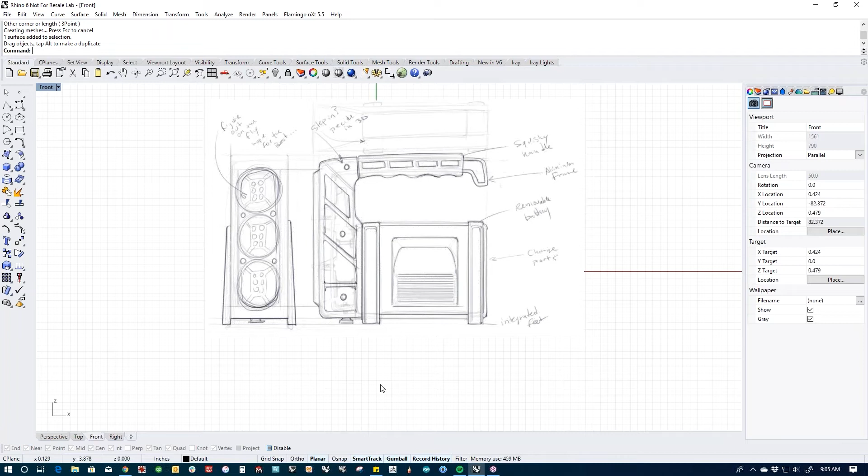So I decided to design my own, and I did a little thinking about how I wanted to put this thing together. What I was thinking is that this would originally be built off like an aluminum bent frame—this frame comes all the way around here, I'm tracing around this thing. It makes this kind of space frame, then in the front it has this kind of housing that goes over the front, and a battery that tucks in here, and it's got a handle, and then these lenses that we're going to have to figure out what they look like. So this is kind of what I was thinking.

It's a little bit of an ambitious build for an hour, so I may have to lean on the gas a little bit to do this—we may get through it, we may not. I think I can pull it off, but who knows? These sessions are always a little bit of a mystery. If you've been watching a lot of these, you'll see some of them work out great, and some I run right into the fan, and that's okay, because sometimes when it all burns down around you is when some of the most poignant lessons come out. So buckle your seatbelts, we're gonna go fast and try to get this thing pulled off.

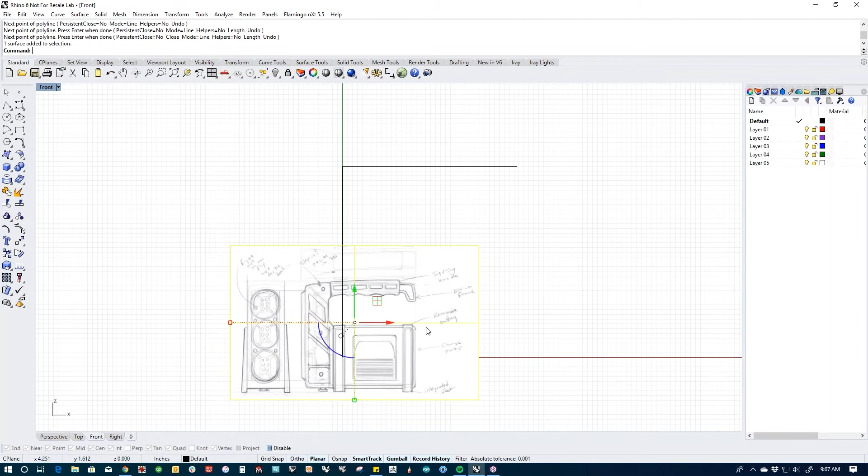So if I were doing this for real, I'd first want to establish some sort of scale, and I'm gonna say this thing is about 10 inches tall. So I'll snap a line at 0, type 10, hit enter, and make a little hockey stick up here that I'm going to base this thing off of. If I pick where the bottom is, say scale, start from here, and scale it up till it matches that line, I know my sketch is now from bottom to top 10 inches.

I can get rid of this line, and then start figuring out what's going on with this sketch. Now, when I build something, I always start with a sketch—I already said that—but I also take the sketch and slide it out of the modeling window, because what I don't want is the model intersecting the sketch, especially in shaded mode where you can't see the sketch. So I usually slide it back in space; it's still in the correct position from the front view, but you can see the sketch as you rotate around the model and see the details. I typically tuck that off in the background so it's out of the way, and then I stick it on a layer.

And the reason I do that is because now I can turn it on or off. I can also lock it so that it's out of the way and it's really unobtrusive.

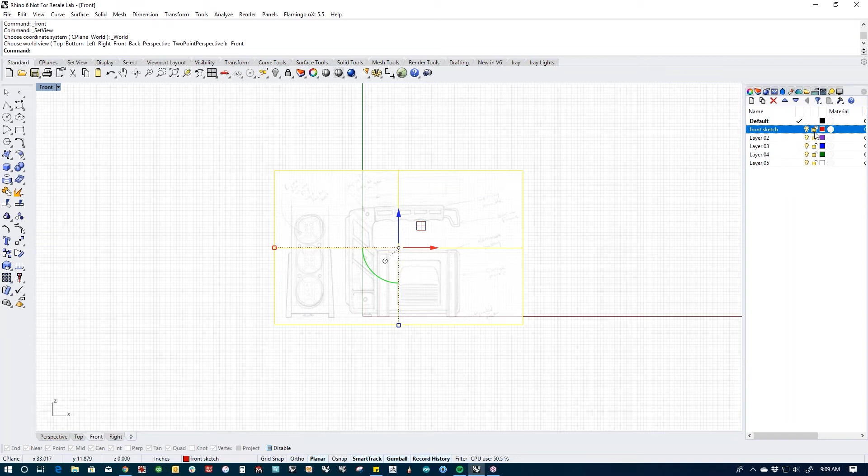All right. And then the last thing I need to do is I need to go to the properties, and I need to go to the materials for this particular object. And you can see that it's listed as a picture frame object or a picture object in 6. And I'm going to just crank the transparency slider up a little bit so that it fades back so that I can actually work over it and not have it be in the way. Once I've got that done, I'll just go ahead and lock this, and then I can work over it all day long and not have any problems.

All right. So let's go ahead and lay out this frame first, because that's kind of the thing that's going to start with. And I'm going to just do this with a polyline, and I'm going to start here and I'm going to just shift click and make this frame. And if you're looking at my really messy line work, you can see that I'm kind of all over the place with line thickness and things like that, but I'm not going to worry too much about it because we'll fix it here.

And the frame, I don't know if you can see this in the sketch, but I was thinking about how this thing was put together. And the frame I was thinking would come in here like this, and then come down and come close to here, and then come back up. Actually, I'm going to make that closer to the end here.

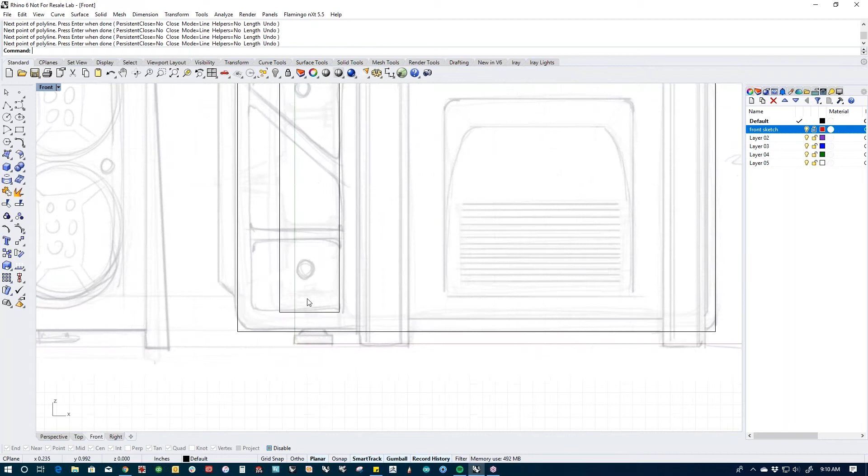And the idea was that this frame kind of flexed, right? It was a single piece of aluminum, and then it had a bolt down here that went through it that squeezed this portion, which then squeezed the battery and kept the battery from falling out. So that's my design thinking, and I'm sticking with it for this point.

So let's turn the points on, and then I'm going to take this point here, and I'm just going to use Gumball, and I'm going to snap it to there, and then I'm going to pick this, and I'm going to use Gumball to snap it over there so that everything lines up.

Now, one quick thing about Gumball. If your Gumball doesn't snap, click the bunny tail here and make sure that you have it set to snappy dragging, not smooth dragging. Snappy dragging respects O-snaps, smooth dragging does not. And I believe smooth dragging is the default. It may have been changed. It used to be smooth dragging was the default, but snappy dragging allows it to respect O-snaps, which is super useful.

So the next thing I'm going to do is I'm going to actually offset this curve because I need to get my thickness in here. So I'm just going to go up here and offset. I'm going to do this before I add any fillets or anything like that. 0.25 is a little high. Let's go 0.2. Maybe that's a little bit too big still. 0.18, something like that should work. So you can see I have my offset here.

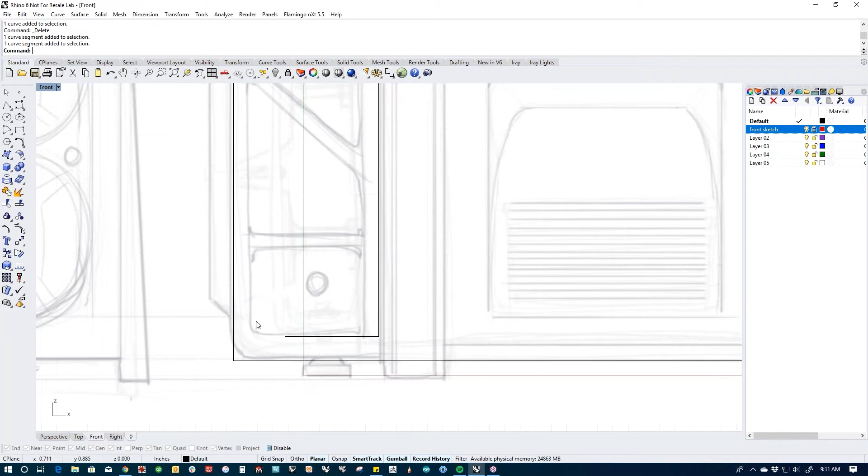And that doesn't give me a whole lot of compression in here. So I think what I'm going to do is delete that and actually open this up a little bit like that. And then I'm going to offset again.

One of the reasons that I do this stuff in this kind of sketch conversation with myself is to try and figure things out in sketch form, but sketches aren't real, right? You can lie, cheat, and steal in a sketch like nobody's business and get away with it. When you get into 3D, the decisions that you make are real. And so what I tend to do is I'll do a little bit of planning and talking to myself with the sketch. And then once we get into Rhino and the decisions that we're making are real, then I start to adjust things.

So I could tell right away that this wasn't going to be enough compression for this thing. I'd never be able to get a battery in and out of there because there wouldn't be enough flex in this frame. So I had to open that up a little bit.

So now let's use a command called fillet polylines, fillet corners. And what this is going to do is fillet every corner in the polyline, and a 1-inch fillet radius is way too much. So let's do a 0.1 and see what that looks like. And you can see it goes through and fillets every single edge on the polyline.

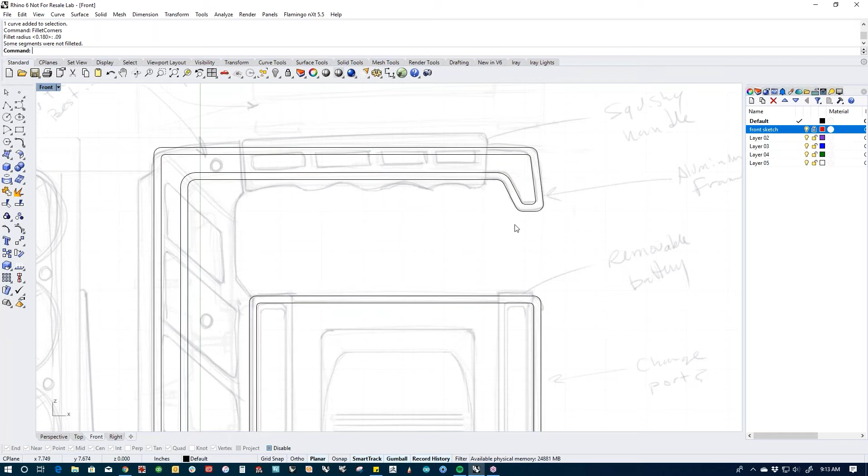And I think 0.1 is not quite enough for this, so I'm going to redo it and do 0.25, and that's too much. So let's do 0.18, and I think that feels about right. So now I need to do the inside corners. So let's do this, and I'm gonna do like, I don't know, 0.09, and that should give me kind of a comfortable offset around this whole thing.

So let's take this and turn it into a planar surface, and then we'll take this and, using the extrude dot on Gumball, I'm gonna hold down Shift and extrude in both directions. And I'm going to just guess at how much width I need because I can always look at it and adjust it visually later. And I kind of feel like that's a good amount of space for the circles on this thing.

And I can even start laying this out and say, okay, the lens on this thing is going to be about this big. And then I'm going to rotate this lens 90, and then let's look at it from the front view and see that actually works out all right. I think that's going to be okay. So for a width, that's probably good. We'll stick that landing here and call it good.

Now let's go ahead and build the battery because that's going to be the easiest thing to dig through, and I'm pulling at my collar a little bit here with the ambition of this for an hour, but we'll see how we do. So I'm going to steal this curve

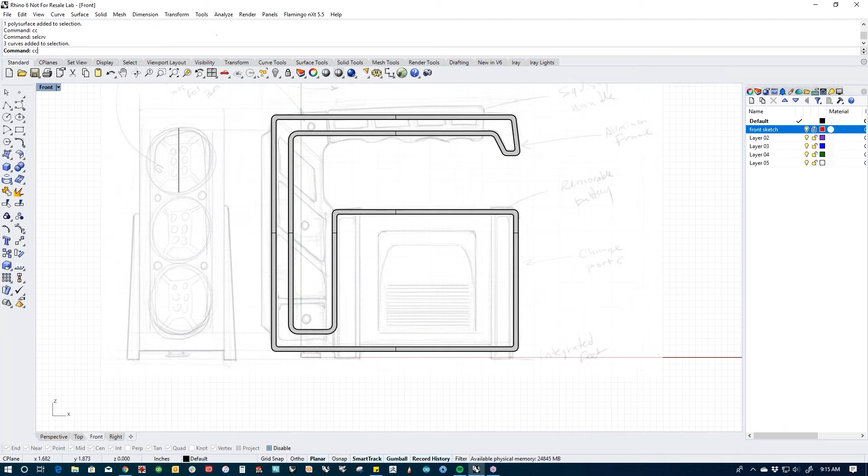right here, and I'm going to isolate that, explode it, and get rid of this and all of this and this and that, and then I'm going to take this point here and just pull it across there and then trim both of those edges off, and then we used a what, 0.09 fillet. I think that's what we did. Put it in here. So that is now the battery case curve.

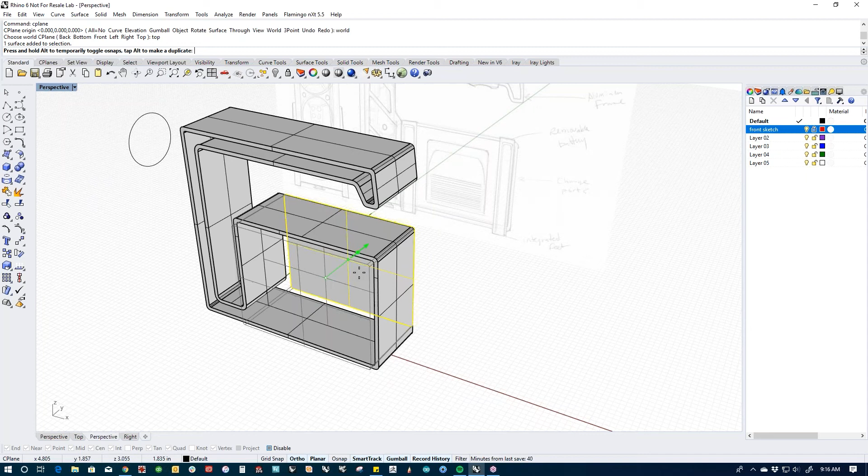And I wanted that to fit tight, right? Because this is like a friction fit between these two. So let's turn this into a planar object and then click on it, hit the extrude dot, hold down shift, and I want this to poke out a little past it like that. Okay, and then we'll build these little feet, and watch this.

I don't want to work hard. I want to lie, cheat, and steal when it comes to computer modeling. Not in life. That's not right. We don't do that in life. But computer modeling, lie, cheat, steal. That's what we want to do.

And I'm going to just steal that part because it's already built. And I'm going to scale it like this to get that foot. And I'm going to make it a little bigger. So it has to come out like that.

And then I may actually even take, I was playing around in the front view if you look at this, and I think that I want this to have a little bit of a trapezoidal shape. So let's look at that. And I may make this a little wider, maybe even a little wider. And then let's just draw a line and hack it off. Something like that. About like that. That feels right.

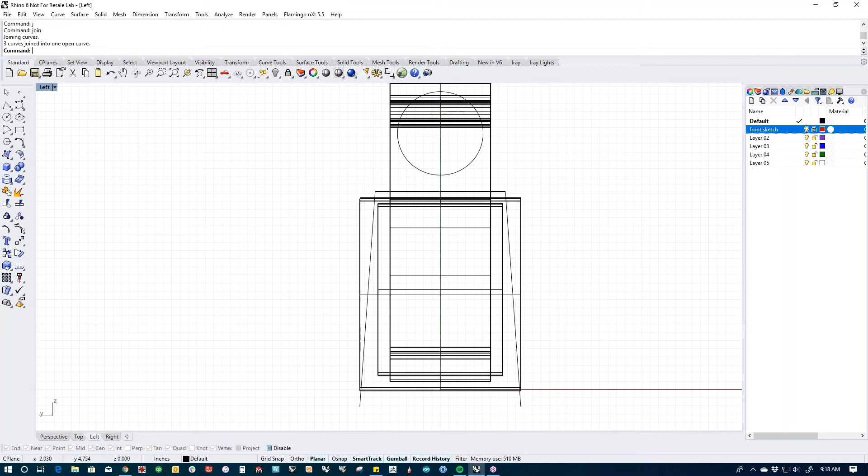And then let's mirror it. I have a hotkey set up for the mirror command if you're wondering where that came from. I'll try and at least call out the commands if I'm using hotkeys. I am going to use hotkeys today because I have to move fast. And then we're going to use the wire cut command, and we're going to just cut right through this thing.

Now, you'll notice something that I did. I took this curve and I connected it because wire cut only lets you pick one curve at a time. So say, for instance, you've got an object and you need to do a complicated wire cut through it, like you need to cut it here, and like that, and like this, and like that, right? Say this is your object, and you needed to cut it through like that. Just go ahead and connect the ends of these and turn this into one curve.

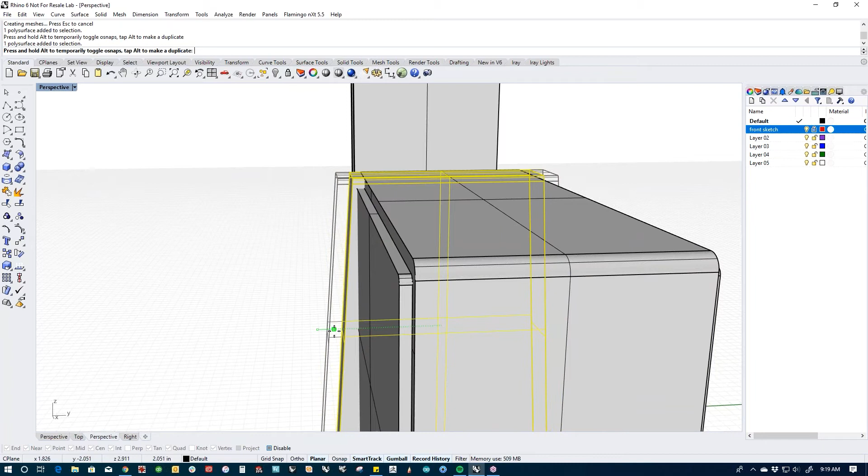And then you can wire cut through the thing all at one time, and that'll save you having to do it twice. All right, so I wire cut through, got rid of these pieces, and that gives me that guy. And maybe this battery's a little wide. Maybe the battery fits very close to within the frame, and the feet hold it in like that. That feels a little better. It was starting to get a little crazy on me.

And then what I want to do is I want to actually finish the details on this thing first, because you can see there's a little detail back here on the side of it. So I'm going to build the details into this thing, then I'm going to copy it, then I'm going to Boolean it together, and then I'm going to Boolean out the parts so that it fits all together at the end. So let's go. I'm going to isolate this, which hides everything other than what you've picked. And let's go ahead and draw our detail.

And see how my fillets have gotten kind of stinky here? Watch this. I'm gonna again do a little bit of cheating, and I'm gonna just scale this thing a little wider and a little taller, and I'm gonna get my fillets back with a really sneaky little way of just taking a rounded rectangle and putting them back in, and then wire cut. Ta-da! There's my fillets again. So a lot easier than rebuilding it.

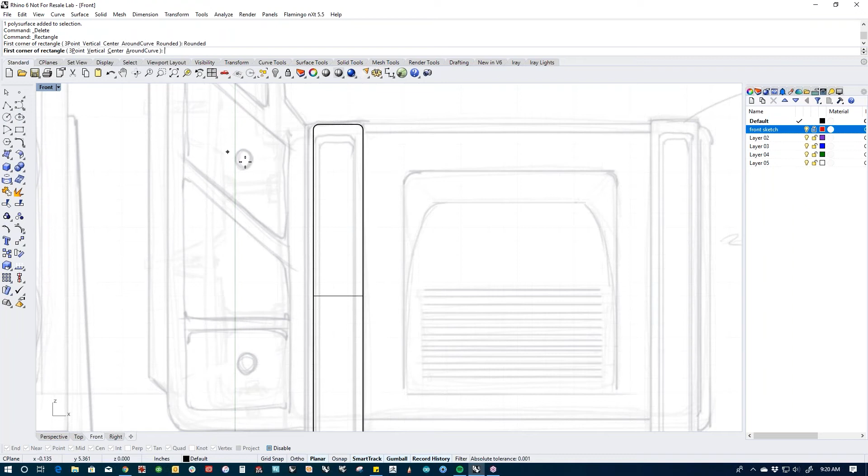All right, so let's add this little detail. And I'm going to do this with a rounded rectangle as well. Actually, I'm not. Or am I? Let's see. Yeah, rounded rectangle. And I'm going to draw this in here like this and put this detail in. And I am going to round that. But what I'm going to do is explode this and get rid of the bottom ones. And this is the formula for doing these details, by the way. I'm going to join this up, and then I'm going to copy and paste, and then I'm going to scale this down a little bit.

So you need an inside curve and an outside curve in order to make details like this. And if I turn these on, I'm just going to snap these points flat, and then I'm going to connect this. So this is the formula. You need an outside curve, an inside curve, and then these are going to be rail curves. And I just tipped my hand in how this is going to be done, right? So this is one rail, this is your other rail, and these are your generation curves.

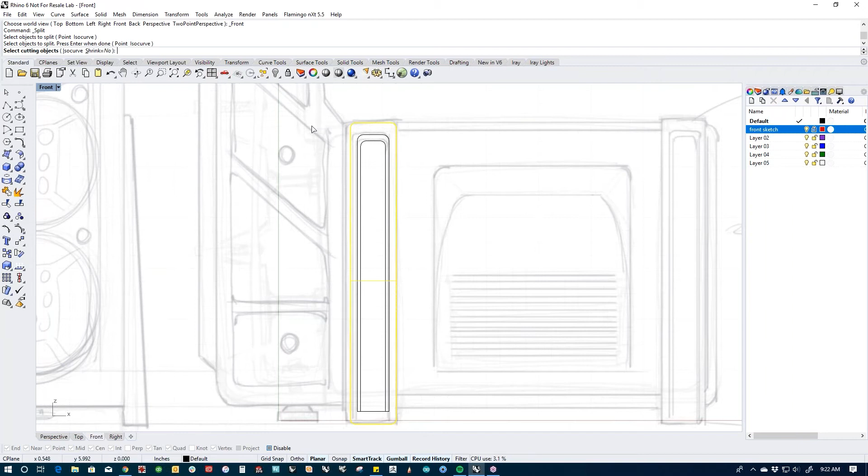And then the last piece that we need to do is we actually need to break this face into a couple pieces. So let's extract this face here. And let's get the curves and this face, and let's isolate it so that we're just working on that face. Now I'm going to use the split command, and I'm going to split this face using all of these curves. And the result is, I've got a face in here, I've got a face in here, and this is going to be your gap. This is where the blend is going to happen. So I'm going to delete that. And then I'm going to keep this face.

I'm going to go to my right-hand view, and I'm going to turn its points on. And you can see right now that it's just a degree 1 curve, right? It's only got points up here. So let's use shrink trimmed surface, and it shrinks it down, but it's still only degree 1, because it's only got 2 points. I'm going to change the degree to degree 3, and that's going to give me 4 points without changing its shape. Changing degree, if you're going up in degree, adds points, but it doesn't change your shape. Whereas rebuild, there's actually a tolerance in there. It'll actually move and change your shape a little bit.

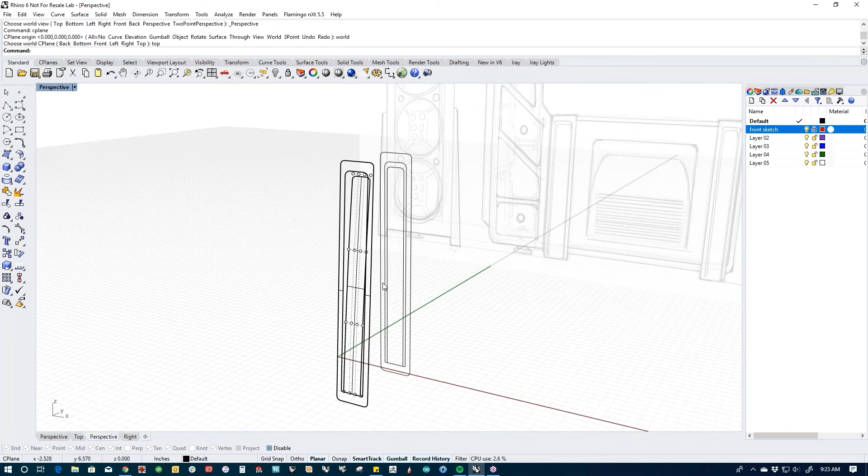And what this does is this gives me points. And the points I can bend. And so I'm going to come up here, I'm going to bend these points like that. And the reason I'm bending the points and not the surface is if I bend the points, the surface doesn't rebuild with the bend command. If I bend the surface, watch this.

Look what happens to the surface. See how it rebuilt? See all these extra points? If I bend the points, I'm just bending the points of the surface. So I'm actually using the bend deformer, and I'm leaving this row alone because I don't want to move it. I'm just bending the points. If I bend the points, then the surface is going to follow. It keeps it nice and light and super manageable.

Now I can join this up, and if I check my edges, you can see that this edge stayed joined down here, which is important. And then all I have to do is either run a blend surface or a 2-rail sweep set to tangency. And I get a nice little blend in there. Now, I probably wouldn't do this with 2-rail sweep because there's no control, right?

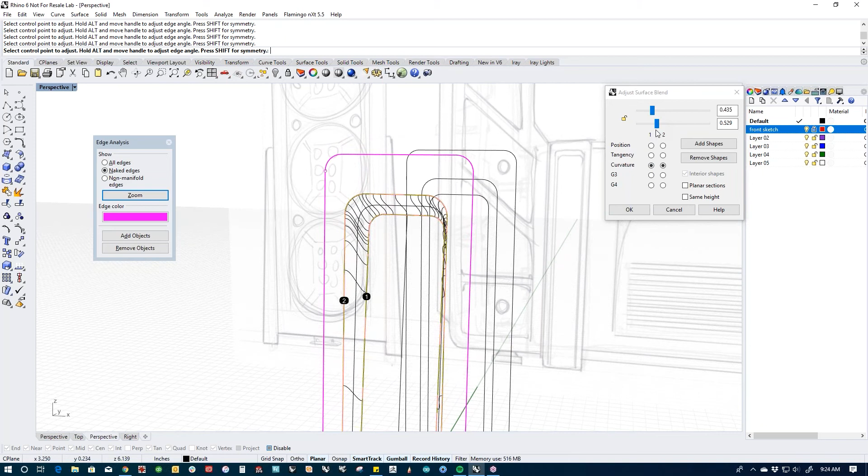And what I really want is to use a blend surface so that I can come in here and adjust this exactly how I want it. Maybe I want to tighten it up at the bottom, give it a little bit more at the top, and then say, okay, and that gives me my nice little blended pocket in there.

I may have to do a match surface at the end, may not, let's just see. And in this case, it looks like it joined up fine, so we'll go ahead and roll with that. So that's the detail there. I'll join it in. I'm going to knock the corners off of this thing at this point, and I'm going to do that with, I'm going to right click and use blend edges, chain the edges.

And what did we use on a corner in here? I can't quite remember. It was like 0.09 or something like that. So I'm gonna go ahead and do that. And if we preview it, we can see that this is going to be a mess right now. So it's way too big. So I'm going to set all and do like 0.06, something like that. And that just knocks that edge off. And that's cool. So because I've got one side done, I'm going to isolate, go to the top view.

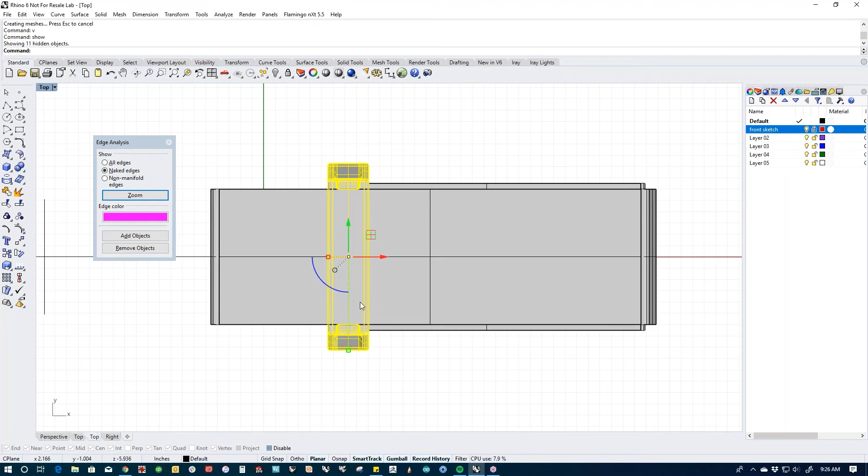I'm going to cut this thing in half. I'm going to mirror it. And then I'm going to go back here and steal this using an Alt drag with Gumball and put it back here. It's a lot of work without really all that much work, right? That's what we want. Now you can see that the battery is protruding through here, so we're going to have to deal with that. But other than that, I think we're in good shape.

Let's run the same blend on this thing to knock the edges off this. So I'm going to run the same blend on here. It remembered what our last setting was. So let's go ahead and run that. We should be good. And we are. And then we've got to figure out how to get this connected without this.

So I think what I'm going to do is I'm going to do a wire cut and then a Boolean, and I'm going to wire cut just around the detail here, like this. I'm going to have to do it twice, unless I was really clever and connected these. Actually, I could do it in one. Watch this. Take these two, curve Boolean, delete the input, and then that turns that into one curve, which I can then use as a wire cut.

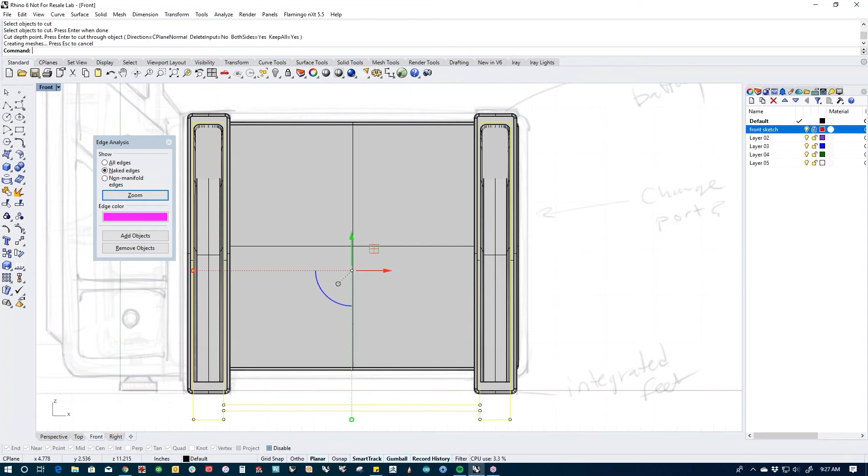And then I can get rid of these pieces, and then I can take all this and Boolean it together. Ta-da! So then we've got our battery. Now, the last thing I need to do is I need to fit that into the frame. So I am going to steal some inside surfaces here.

Copy this one, that one, and that one. Isolate just those guys. Grab this edge, drag it down.

Am I losing everything? You guys staying with me here? Or am I going too fast?

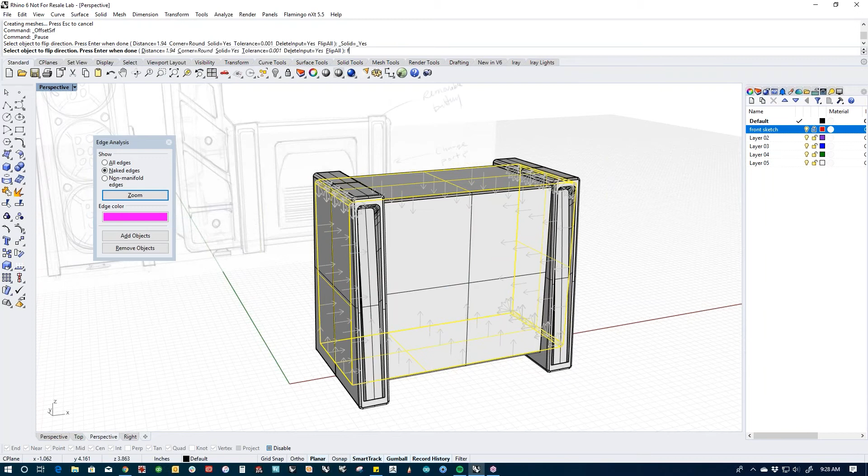I'm going to join those, and then I'm going to do a solid offset to the outside. And I'm going to do it big, like 2 inches, like that, because that's just going to make a big Boolean object. And then I'm going to remove this, subtract from that using this, and there's my cutout for my frame, and it fits perfectly.

All right. Still with me? Like breathing over here like I'm running a marathon. All right, let's keep moving.

So let's do this detail. We're going to do it the exact same way. I'm going to do this with a rounded rectangle. Same formula. And it doesn't matter what the shape. It can be like a parabolic shape. It can be a flare. It can be whatever you want to do. It's the same formula. So copy paste. I'm going to scale this down a little bit like this.

Actually, let's do this one differently. Let's do this one with a hard shape like this on the outside and then a different shape on the inside. So let's explode this, get rid of this, and then let's draw. I'm going to start from the center line, and I'm going to draw half of this. Only 3 points to make a corner, remember? We don't need 50 points to make a corner. And then we'll mirror this, join it up.

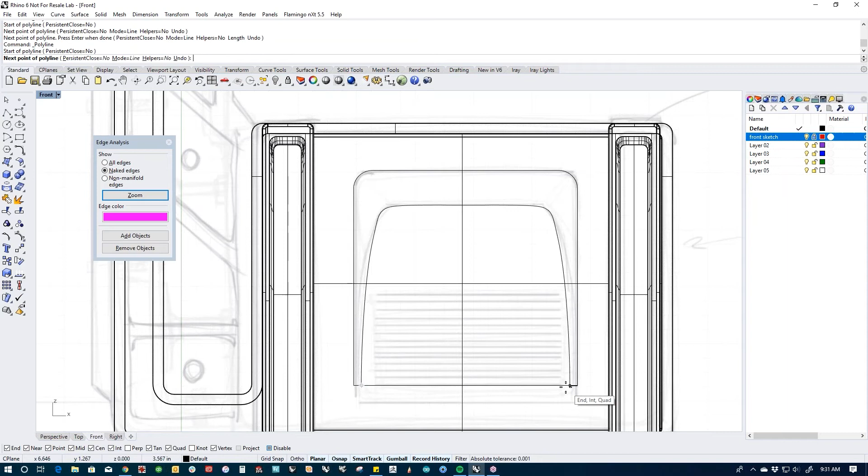All right, so we've got our outside curve, our inside curve, and then we've got the connectors down here. And then the last one is this that breaks this up into a couple pieces. So let's pop the surface out because we're only going to work on this surface. And we'll split. Split this up. This is our gap, so I'm going to get rid of that. This is our face, and I'm going to check to see what the points look like.

And in this case, it's still a degree 1, so I'm going to shrink it. Shrink trim surface brings it down small, and then I'm going to change the degree, 3 and 3. I'm going to leave the bottom points alone. I'm going to grab these points, go to the right view, bend. And I'm going to even start my bend away from the bottom down here because I don't want to mess with that at all. I'm going to bend this in kind of violently. But you can see even that big bend, it doesn't rebuild that surface because we bent the points and not the surface itself. So let's join this back up and make sure it joins.

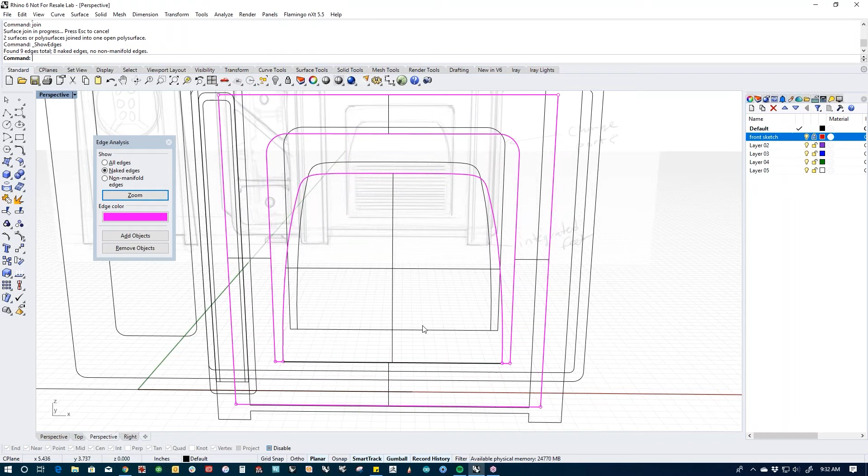If you've broken it, this will be when you'll see it because you'll see a pink line here instead of a black line. And so you want to just double check it before you go. And then I'm just going to run a blend in there, and I'm going to drag this a little smaller just to straighten out those isocurves just a little bit. And I don't need curvature. That's a little crazy. Say okay, and let's check it out. Okay, so that's our nice pocket. Should all join up, and it does. And you can see that we get a really nice kind of little technical detail in there.

All right, so let's add the ribbing in here. And I could have, before I bent this surface, put these details in there and then bent the surface, and the details would have bent as well. But I'll show you a trick on how to deal with that. So I'm going to take one, and I'm just going to do it a random width, like a 1/4 inch, and then let's go to shaded view, and I'm going to poke it through here, and I'm going to make it pretty big like that. Doesn't even really matter how big.

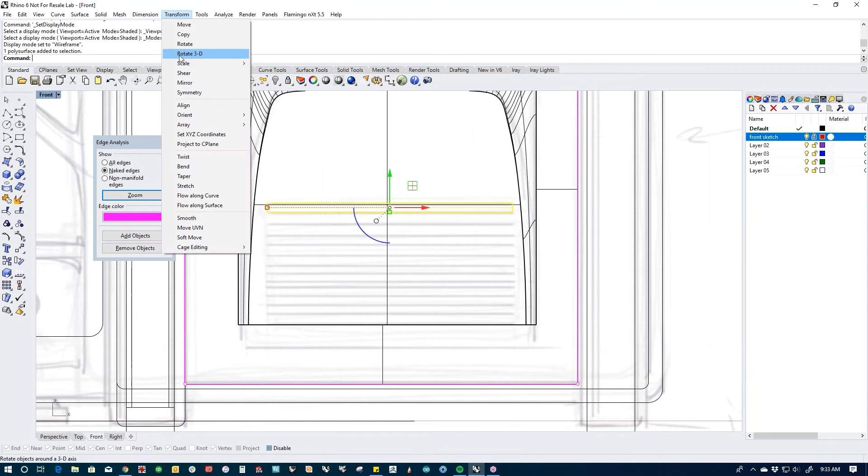And then let's take this, and I'm going to do a linear array, and let's do, I don't know, like 8 of them, 9 of them. And I'm going to start here, and we'll just pull down like this. And then there's another cool command. So that's the way to do it if you want them to be super even.

But what if you're like me and you just hack stuff together? And I were to drag these guys and say, okay, I want about this many, like that. And I would say that's about how many I want, but they're obviously not evenly spaced. Let's see if I'm remembering the right command.

I want to distribute all of these guys, and I want the spacing to be automatic, in the Z axis. You can see what it does is it should have updated all of those. Let's grab all of this stuff. I might have picked the wrong axis, I'm going to pick a direction I want to distribute them in.

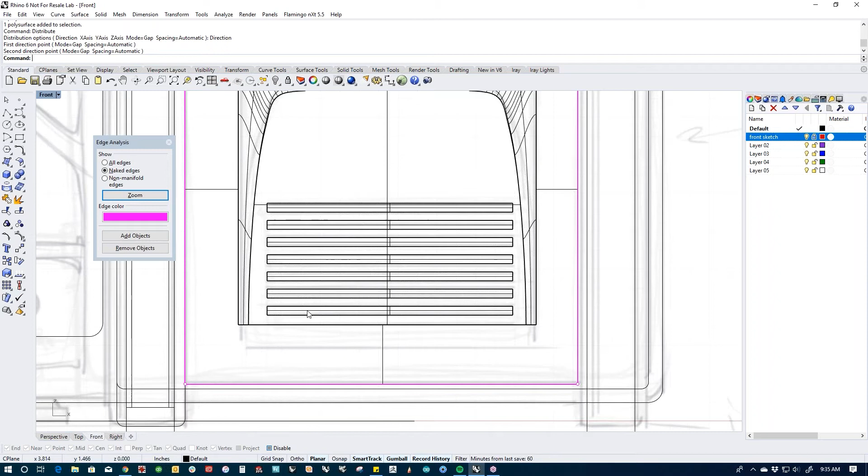I don't know if you do like I do, like when I'm putting rivets on something—I do a lot of models for the toy industry, and I'll have to put rivets and stuff on everything. I'll drop them down, and then I'll look at them and go, the spacing on that doesn't look right. If you select them all and say distribute, bloop, it redistributes them and makes them all the same spacing.

All right, and it looks like I jacked that up from the front view, but it doesn't even matter. I'm just going to pull these back. All they have to do is intersect the surface. It doesn't even really matter by how much, and I'll show you why.

Because what I'm going to do is take these and use a Boolean split with this object, and then I'm going to throw all of this away. And then I'm going to take these guys and just move them forward. I can even do this numerically if I know exactly how far I want to move them, but I never do anything numerically. So I'm just going to pull these guys forward a little bit, and then they poke through all the same. And then what I'll do is Boolean this stuff together.

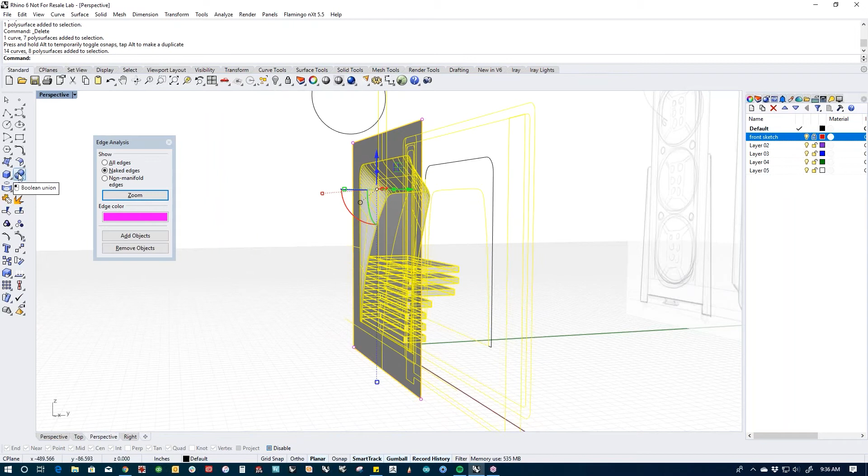And there's my finished detail. Bring it back. Got a face in here somewhere that I want to get rid of—this one. Isolate that, I'm going to delete this face. Mirror this, join it up. And there's our battery.

Woo, 937. Got to move.

So this battery handle, I'm thinking, is probably going to be a little bit too wide for holding it in your hand position. So we need to put a relief in here for where the handle is. I think what I was originally thinking was that the housing would blend into that, but I think what I'm going to do is actually neck in where the handle itself is. So let's figure out where that's going to happen.

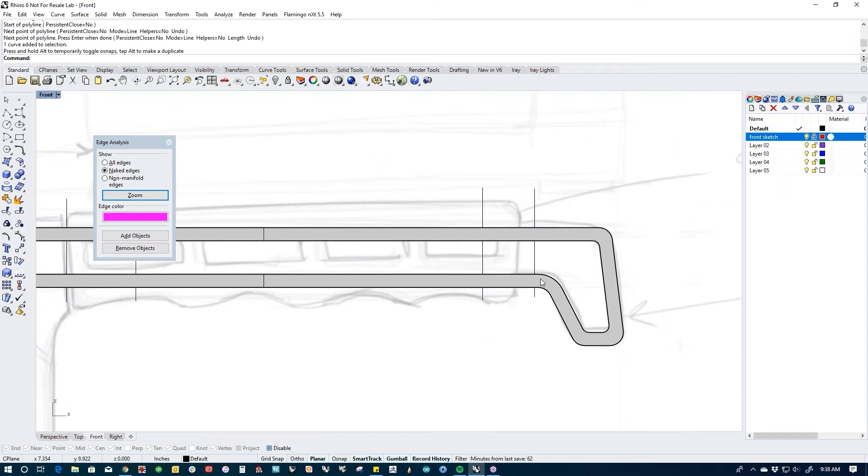I'm going to pull a trick where I'm going to split it here, here, maybe back a little farther, and then something like that. And because if I stay out of this fillet—because all of this stuff up here is essentially degree 1 flat surfaces—watch this. I can take this thing and split this object using all 4 of these curves.

And then I can join this all back together, which seems counterintuitive. But what it gives me is I can grab this and this, this and this, and then this and this, and use Gumball. I Control-Shift selected that, by the way—that's a sub-object selection. If you haven't used sub-object selections in Rhino, look up Brian James' video called Hello Gumball.

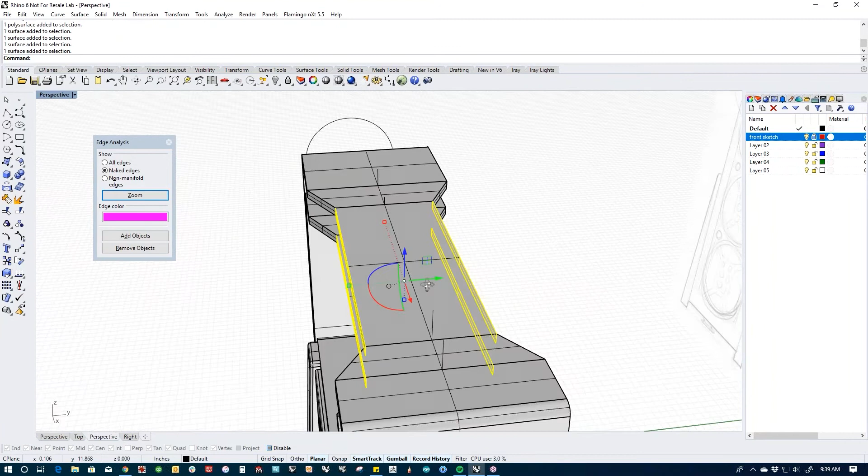Great stuff. And then I'm going to just scale these guys in and watch what happens. It all updates, but stays a single polysurface. And then it gives me the ability to later say, ooh, handle's not big enough, handle needs to be bigger, or maybe this thing needs to be much smaller. So I can just come in and repick these, Shift Control click, and then scale them in smaller.

And this element back here is now an element onto itself, so I can even say, well, that thing now looks too big, so I can scale that in. Because all of this is just degree 1, there's no calculation—it's just 2 points, just moving those 2 points closer and farther apart.

All right, so let's make the handle, and let's do that simply. Did everybody follow that, by the way? Subobject selection: Shift Control click on a polysurface. So a cube is a polysurface.

I'll show you some really quick gumball tricks. Shift Control click, drag to make it bigger or smaller. You can also rotate it. You can also drag, tap Alt, and break a face off. You can Shift Control click, drag, and extrude an additional face, which gives you the ability to extrude more faces, so you can actually do some little box modeling type of stuff.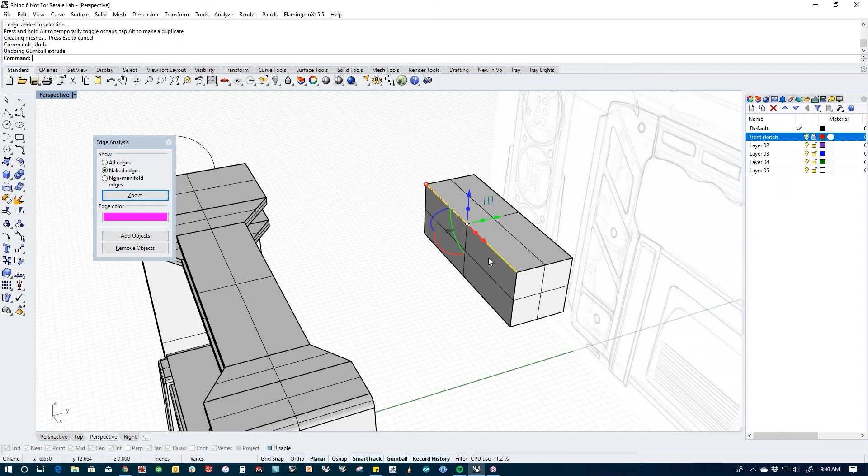You can Shift Control click on an edge. You can modify just an edge. Shift Control click on an edge and extrude just an edge. Or you can drag, tap Alt, and break an edge off and have a new curve. All right, the rest you'll have to watch Brian's video, but that's a little primer as to what Gumball can do for you.

All right, so let's go ahead and draw this thing. I'm going to do it as a square object, and then we will knock the edges off later. I'm just going to pull this a little farther, like that. Close that up, and then I'll go ahead and put the finger nubs in here. I'm going to do that with an ellipse.

And we will copy, settle down. And again, this is a situation where I could use distribute because I just copy pasted those things. So I'm gonna distribute, direction is gonna be from here to here. And you can see that it just evened up the spacing on that.

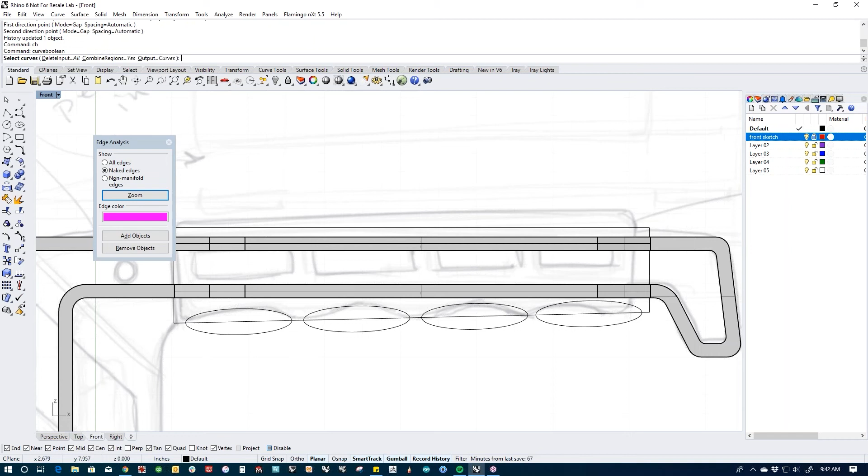Do a curve Boolean. We're going to pick all of this stuff. We're going to delete the input, and I'm going to pick inside here, and it'll get rid of everything else. And I don't like this, so I'm going to explode this, and then we'll use blend curves between the two. Something like that. I'm moving quick here, so I'm not really nailing these down accurately, but you get the gist.

Join that up. Turn into a planar object. We've done this dance before. Start extruding, hold down shift, and I'm going to bring it all the way out past the edges here. And then I have to get it to the right shape first.

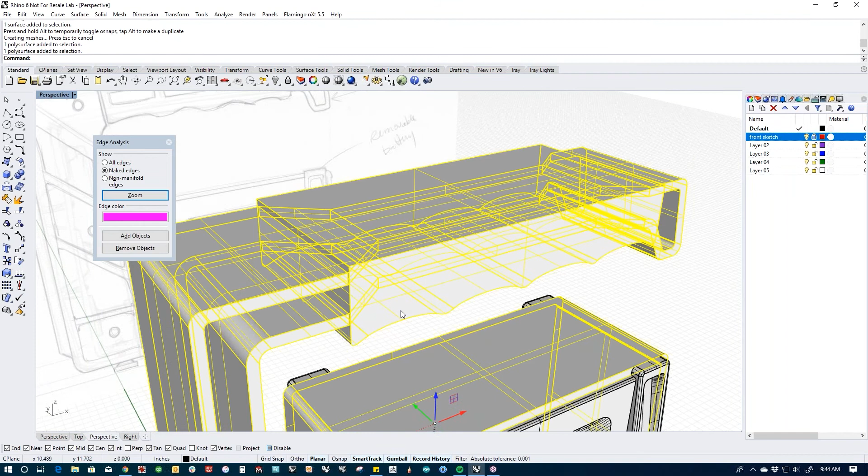So let's isolate these. Ooh, getting close. And then I'm going to do this with a little softer profile. I'm going to mirror it. I'm going to connect them so that I can cheat and do wireframe all at one time, or wire cut. Like that. And ideally, I would have a little softer handle on that.

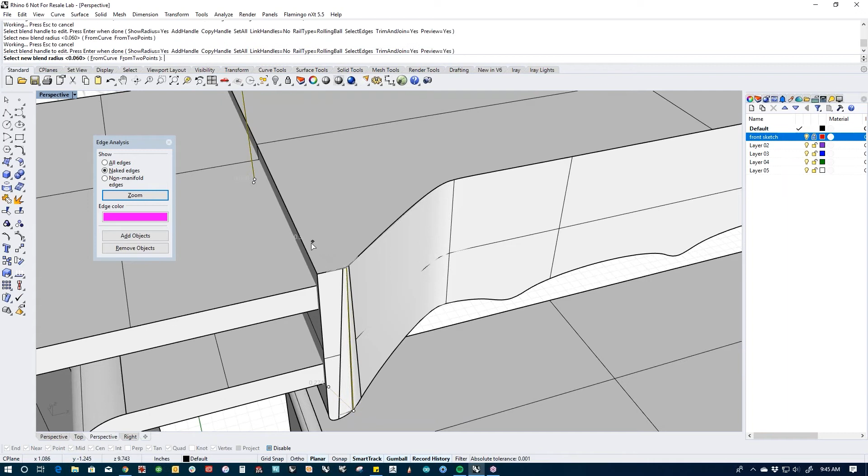So let's do some filleting. The radiuses and stuff on this are pretty tight, so we'll have to do it a little bit at a time. Let's do these first, and let's try and get these as big as we can get them. Let's make those bigger, right, like that. That's 0.03. Let's try 0.035. So that'll work, and 0.035 is as big as we can go because that's what this radius is.

So let's do these edges up here, and we'll do those at... can't do it at 0.035. We have to do it a little bit smaller than that, because if we try to do a blend on top of a blend at the same radius, it'll fail. And in that case, it's still failing. So let's do... there we go, that'll go. Do the same thing over here.

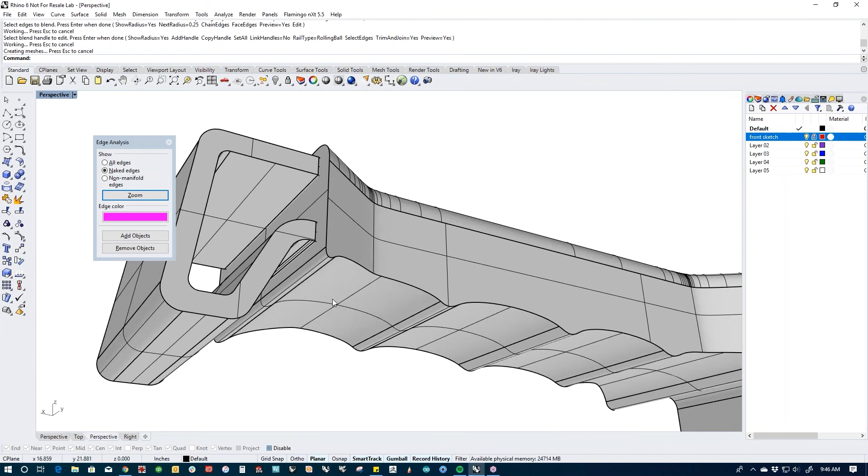And then at the bottom, we've got a little complicator down here. We may actually need to do a variable fillet in order to get that to go. But the other thing we could do, which would knock this off and make a bit different scenario for ourselves, or we could even do something interesting like this, where we pull out all of this. I think I'm going to like this better. Maybe not, maybe it'll be a horrible failure. We'll see. And I'm going to chain this.

Maybe I want to split this edge. Here's a cool trick: split edge. Oh, there's actually a split there already. When you turn on your edges, see these dots? Split edge allows you to break this into smaller pieces.

So let's do chain edges, but I'm not going to auto chain them. I'm going to pick which ones I want, and then we'll do the same ones on the other side. This is going to give us a really nice soft handle, or it's going to make a horrible mess. We'll see.

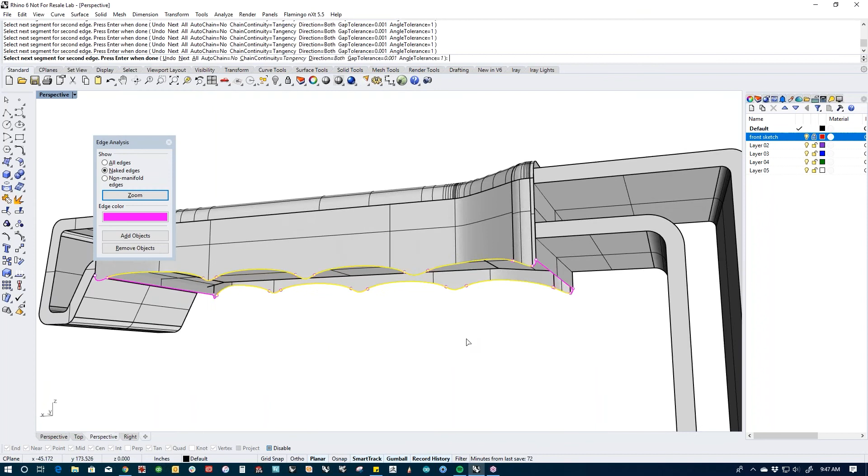Kind of a horrible mess at this point. I'm going to take out the interior shapes, and then let's back this way off.

In this case, I like all of this. I don't like this, so I'm going to shift drag and make that much smaller. And then I'm going to shift drag this and make that much smaller. And then I'm going to add a shape kind of somewhere in the middle, shift drag and make that smaller, but it's going to give me some more control in the middle of here.

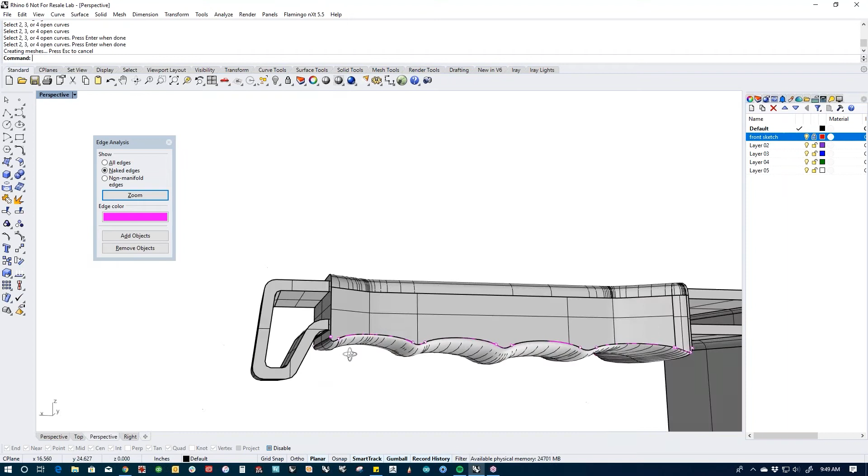All right, that wasn't terrible. This is going to be a little messy up here, so I'm going to just hold my nose and do it, but I'm going to just do a four-sided surface right there and a four-sided surface right there. Sometimes winning ugly is still winning, and I think at this point we're winning ugly on that, but I'm going to just call it good.

All right, how are we doing so far? Everybody still with me? Nobody's run for the door yet.

Let's add our little details in here. I'm going to do those with rounded rectangles, and I'm going to alt drag or drag with an alt tap. And I'm going to use the magical distribute command again.

In this direction, and it just makes that all just work fantastically. So because I can't wire cut closed curves, I'm gonna just shift drag and extrude those as a surface. And then I'm gonna cap these.

So nothing that we're doing today is hard. This is all like really pretty basic stuff. But what I'm trying to do is give you different ways to think about how to use these tools so that you can use them more efficiently.

And I'm going to just knock the edges off this just a tiny little bit, and I'm going to use a very small one. That'll work.

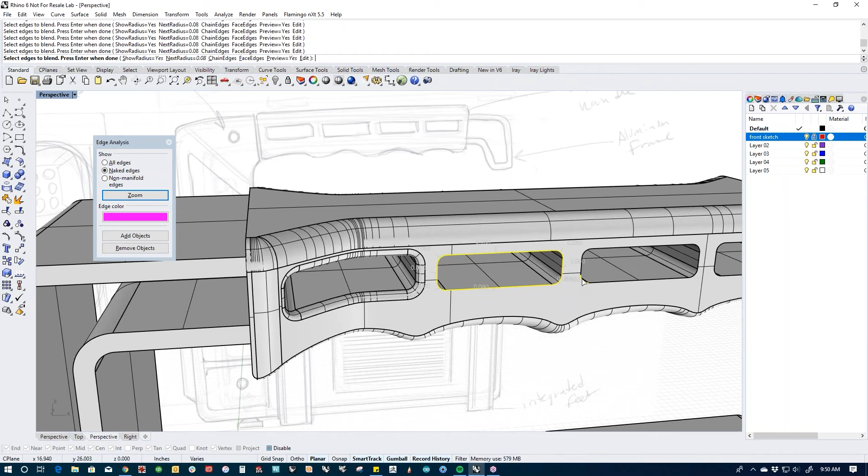I could use chain, but I'm already in it. I'll use chain for the other side. All right, so those all worked. Over here, I am going to chain these. Chain this one. Chain this one. Chain that one.

All right, so there's our handle. And I probably would knock the back of this off at a later date, but I think I'm fighting time, so I'm going to keep rolling.

So let's make our housing. Let's see what we got so far. How we doing? That looks kind of coolish. So let's make our housing.

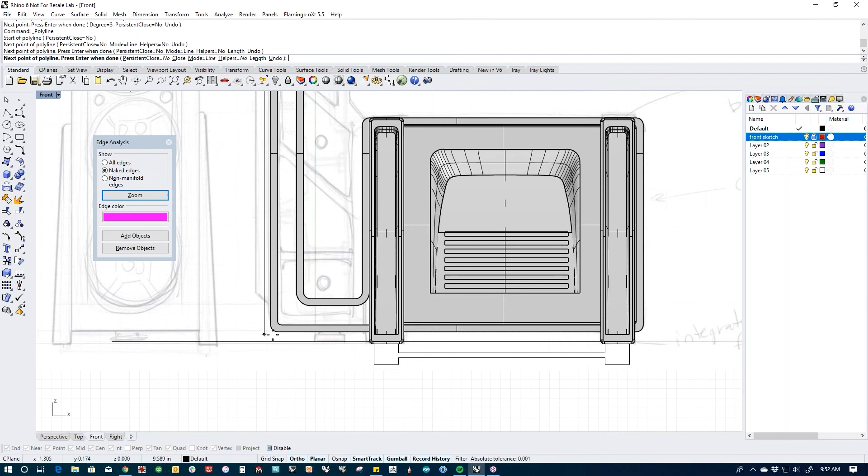I'm going to do this just by starting to draw a curve here. Actually, I'm going to do this with a polyline, and we'll clean it up later. The reason I do polylines first is because you can always go and mess with them later and get what you need out of it by cleaning it up and adding fillets.

And then I'm gonna do a blend from here to here, but the second one is gonna be positioned like that. All right, so now I can go and clean this up with fillet. Maybe bigger. That'll work.

That'll work. I'm gonna leave this one sharp. I'm gonna knock that one off, and I'm gonna leave that one sharp. Planar surface, same thing we were doing before. Extrude, shift drag, and we're gonna get it out just outside the frame, like that. I'm gonna knock the edges of this thing off with blend.

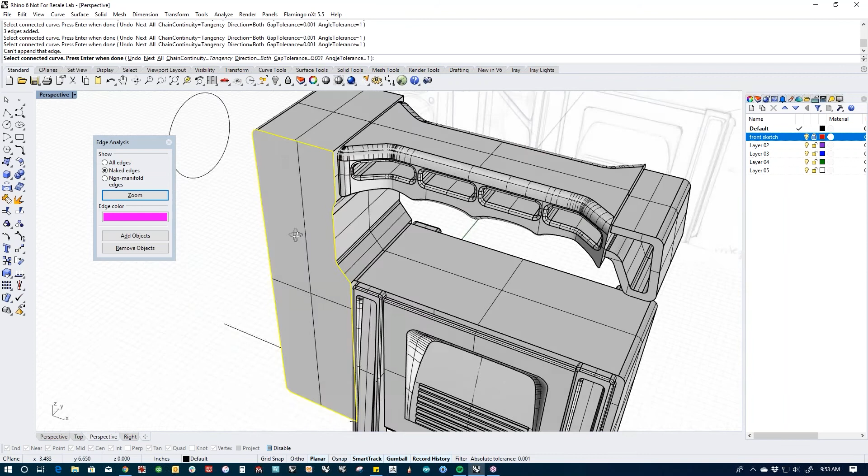Let's see, I wanna get this one as well, and then chain these edges. Get that one as well. Probably this one too. That should get everything kind of softened. There we go.

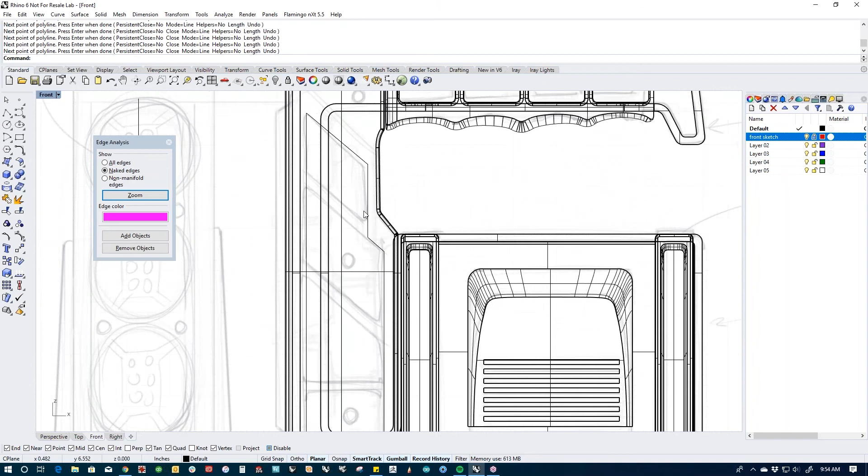Let's put our details in. I'm just going to draw those in. Actually, I'm going to do it like this so that they all line up. Otherwise, this stuff never lines up. There we go.

I'm gonna alt tap drag on that. I'm gonna change my gumball location to here and then drag it to the end. That way that lines up right at the end.

And then I'm gonna do the same thing down here, drag, tap alt, and then I'm gonna extend. Extend, where are you? Extend, it's in here. Here we go, extend curve.

And then just one more down here. Then we'll use curve Boolean to clean all this up. Grab all this. Isolate, grab everything, curve Boolean, keep. Gives us that. And then I'm gonna join all of this. Should already be joined. And then I'm gonna fillet corners. Do it all at one time.

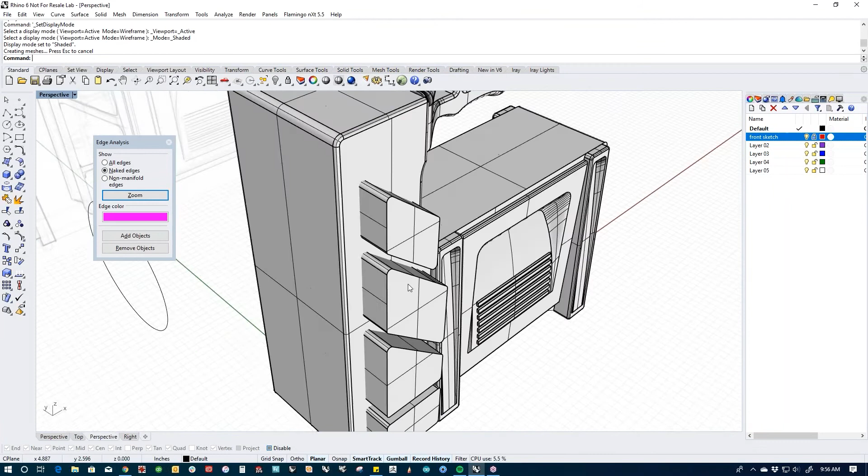And then I'm going to make a planar surface out of all of these. And the reason for that is I'm going to use these as Boolean objects. Yep. Way too much. Let's pull them back to like here. I'm going to mirror this. And then let's subtract using, oops, we want to subtract from that using these. I always keep my Boolean objects just so if I have to mess with them later, I can.

And it looks like we went a little deep on that because you can see the frame through it. Maybe that's cool. Maybe we like to see the frame through it. I don't know. But if we don't, we shift control click these. And I'm just going to scale them out to there. See how useful that is? All right. And then the last thing we need to do is build the frame.

Woo, 9:57. Is anybody else sweating or is it just me?

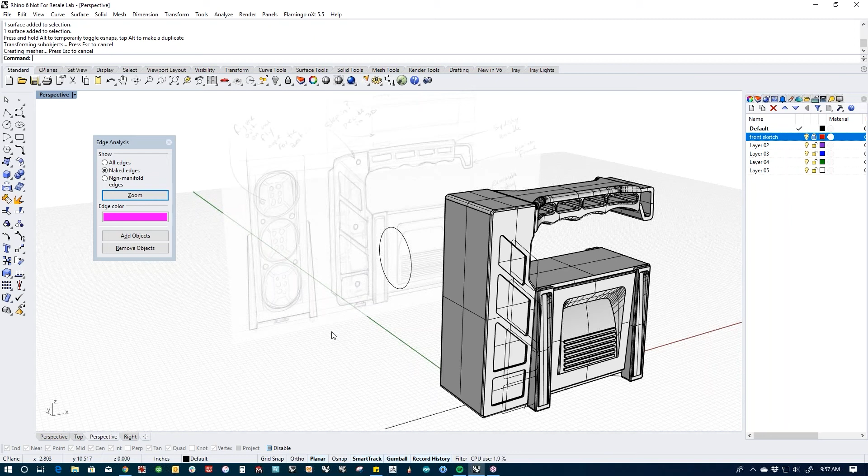Let's go ahead and build the front of this thing. And if I look at my sketch, you can see how well thought out this is. It's incredibly well thought out. But let's go ahead and build this cool little reflector.

So I'm going to start with a truncated cone, because essentially that's what it's going to be. And that's going to be the outside. Let's say the end of it is going to be about that deep. And then we'll say the inside of it is going to be something like that. And that'll be the basis of our reflector. And I'm going to knock the front face of this off for now. Shift Control click delete, and then we can start planning how this thing is going to break out.

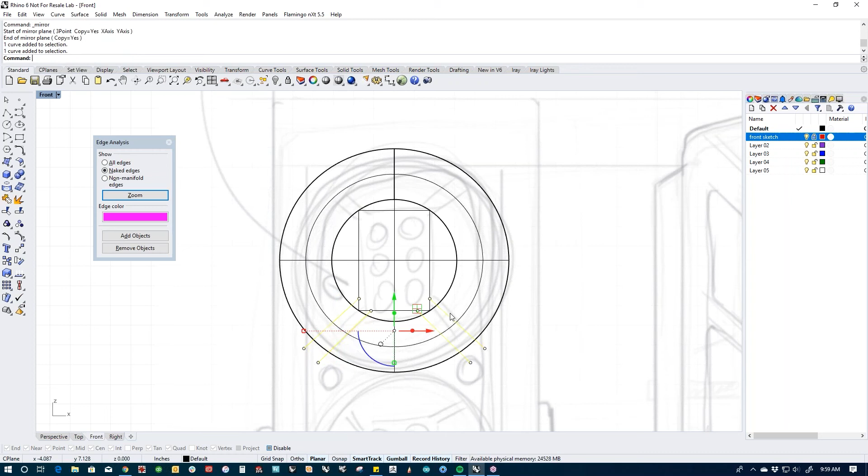So I'm envisioning these sections in here as reflectors, and then there's something tucked in behind there that's got an LED array. So let's do this from the center. And we'll try and do something like that. And then let's draw some polylines in here, kind of there. And then I'm going to mirror this around here. And then let's mirror these. And then let's mirror these.

And it looks like I'm going to make this just a hair bigger. And I'm going to close the ends of these so that we can get a good curve Boolean. Curve Boolean is just like a regular Boolean. It has to have closed regions. So I'm going to grab curve Boolean and I'm going to keep inside all of this stuff.

Curve Boolean is amazing. Like if you were doing a gear and you had to do teeth of some sort, curve Boolean is your Huckleberry, man. You're gonna knock a gear off in no time. Whereas if you tried to do that with trim, it would make you insane.

And so the way I want to do this, and I could get fussier about how these relationships are, but I think I'm going to just roll. I'm going to split this up using this curve, and then let's grab this thing and relocate Gumball to here, and then I'm going to scale these in like this, and that gives me the break and that detail that I needed.

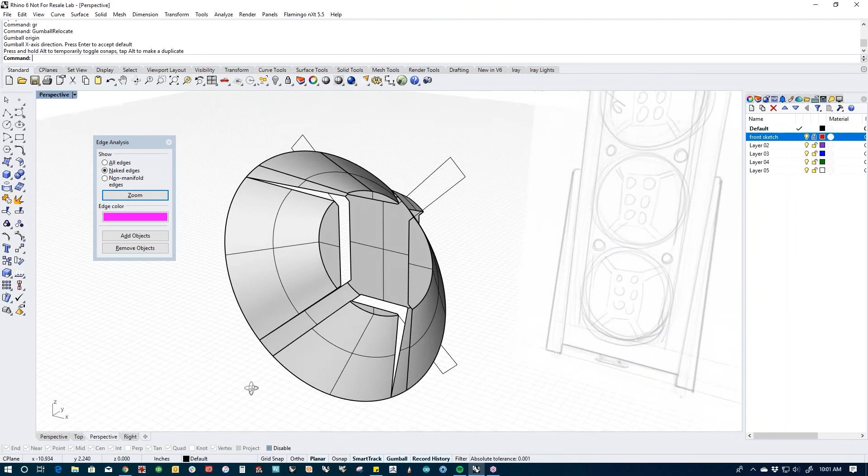And then I'm going to just go ahead and connect this back up using just a simple surface. If I was going to be picky, I would make these relationships designed a little better, but I really want to get this thing wrapped and then throw a couple materials on it. So

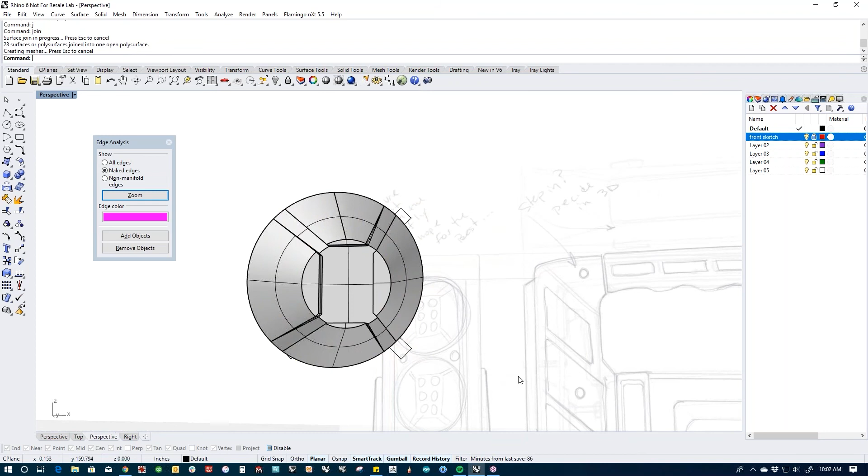All right, so there's that. Join it up. Go to the front view. Let's do our LED array. Because distribute works so well, I'm just going to do this. And then I'm going to pick them all. In this direction. Woo. I think I'm fighting history here, so I'm going to kill my history. And then I'm going to grab these guys again.

Interesting. That's an interesting result. For some reason, it didn't like when I did them all at the same time. All right. And then I'm going to cheat and use these as Boolean objects like that.

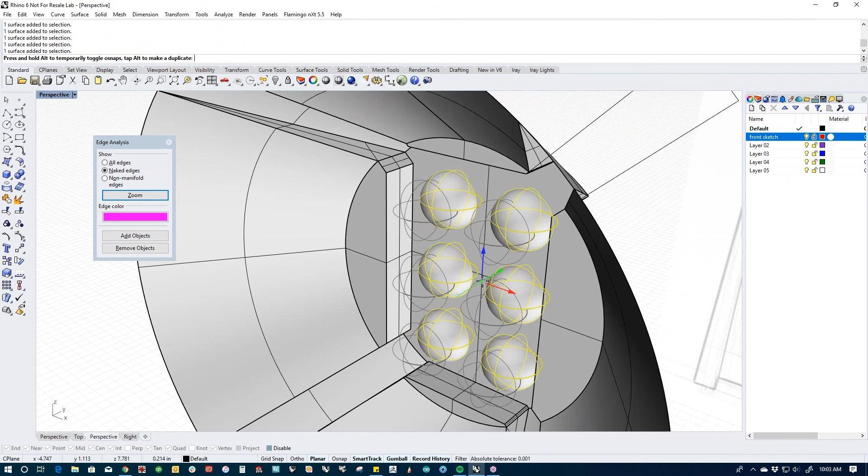And then I'm going to build a few things on top of that. So let's Boolean difference this, take these out. And this is one of the reasons I like to keep the Boolean objects, is I can use them now. And then I'm going to scale this just a little bit and see how that fits into that pocket nicely.

Ooh, it went backwards on me. Let's undo that. So it went backwards on me, so I need to check my normals. See how my normals are facing that direction? I'm just going to flip them and then do this Boolean again. There we go. Now I can scale this.

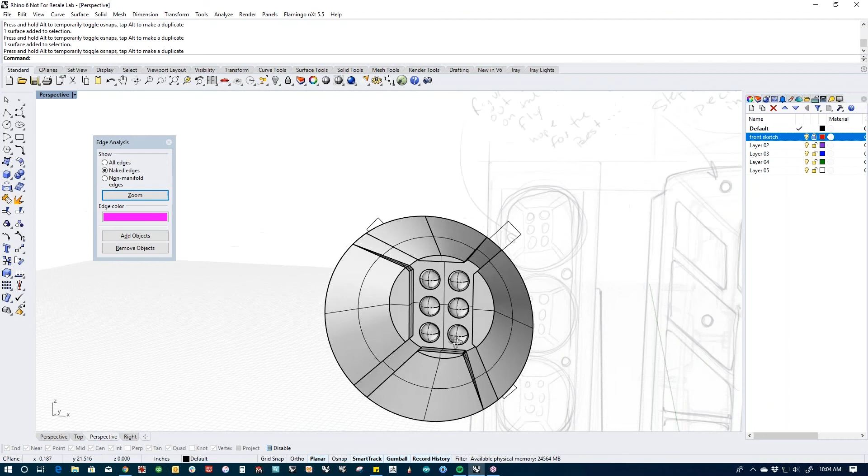And I should be doing this numerically so they all match, but so there's that. So those fit into there. And then let's cap this. Oops, not going to cap it, huh? All right, fine. Let's do a planar surface, which is the same thing as cap. I don't know why cap doesn't work, but planar does. Actually, let's not do that. Let's make 3 of these.

Boy, it really doesn't like those. For some reason, it doesn't like those guys. Interesting. That's fine. We'll call that good. Actually, let's do it right. Let's get rid of that. Let's do a linear array. There we go.

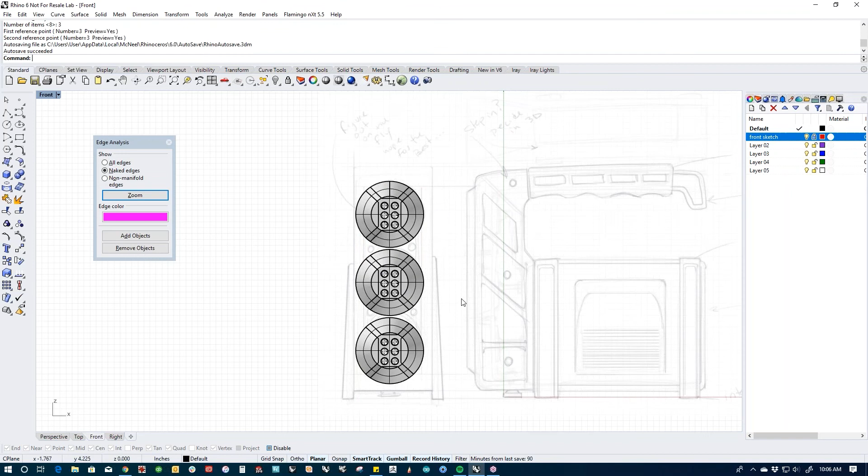And then we need to build a bezel around these things. So I'm going to do that with a rounded rectangle. And turn the points on and adjust it a bit.

Get really good at eyeballing stuff when you're going fast. You guys are like, no, you don't. We see all the lies.

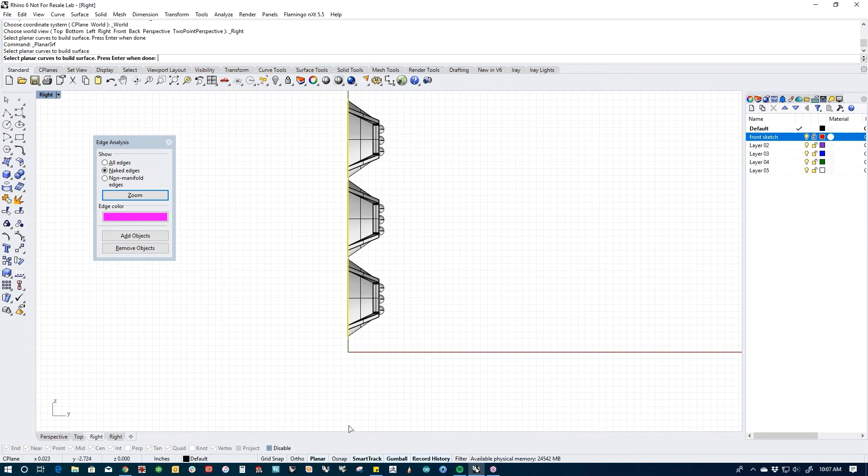I'm going to use Gumball to snap that to the center. And then what I'm going to do is I'm going to build a face off of, let's go to the front view and do it this way. I'm going to build a planar surface out of all of that. I think I've got that all planar. Yay. Join this up. That's the inside of our lens. Grab the edge, extrude it out just a hair.

And then I'm going to grab this curve, and we may have to do some adjustments to this because I think it's getting big for the face of the thing, but that's okay. We can adjust it later. See, I'm just dragging the points in order to make this thing work again. If I scale it, it's going to distort the shape of that. So I'm just moving the points to get it where I want it.

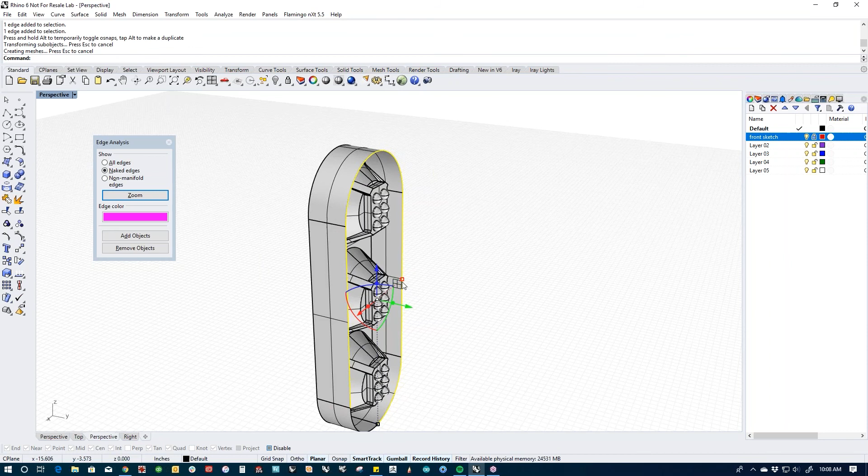And then we'll use Gumball to snap it to the edge of this thing, and then we can do a planar surface with these guys. And then we'll take this edge, extrude it back, but then I'm going to pull another trick, and I'm going to shift control click this edge, and then I'm going to shift drag scale it just a little bit because I want it to have a little taper on it, like that.

And then we'll build a lens in here, like that. And we'll extrude that out just a tiny bit because we want to inset, and then we'll make it just a tad thinner so it doesn't intersect anything. And let's see how this whole thing lines up here.

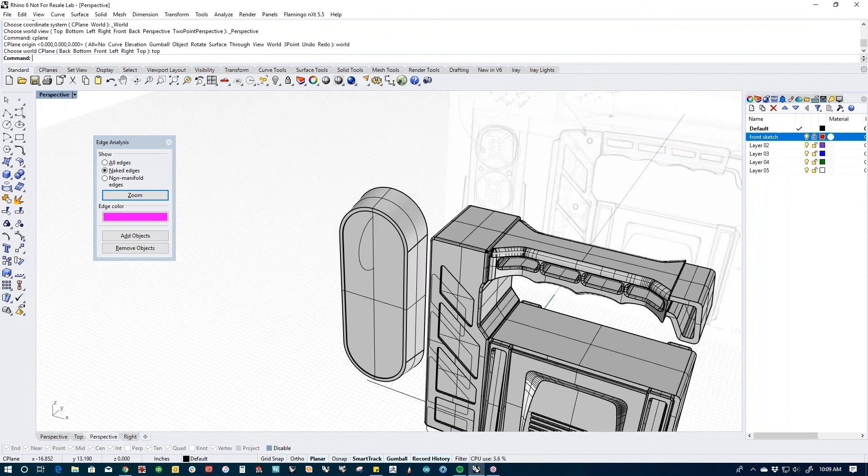And this thing is all sticking back. So I'm going to grab this edge. I'm going to pull it out to there. Actually, I'm going to grab that whole edge, not just pieces of it. See how this is all sticking back? If I were to stick this up in here, that would all be poking back into the frame, and I don't want that. So that can settle right on the face of that now. Let's grab the whole thing.

I'm going to get rid of my curves for now because I don't need them, and then I'm going to clear history just to make sure I'm not fighting any history stuff. And the arrows are pointing counterclockwise, and I want to rotate it clockwise, so I'm going to go -90. And then I'm going to put my gumball right there, snap it to this face, snap it to the center, and then we can see that we're too big, right?

So I have a choice. I can either make the entire light bigger to match the array, or I can make the array smaller to fit the face, and I think I'm going to make the array smaller to fit the face. And that's kind of our build. Now we can add a few more details.

It's 10:11. How's everybody doing? Got another couple of minutes.

I can show you a couple more of my favorite tricks. One of my all-time favorites is the McMaster-Carr trick. If you are outside the United States and are not familiar with McMaster-Carr, it's this fastener company that has everything that you could possibly imagine.

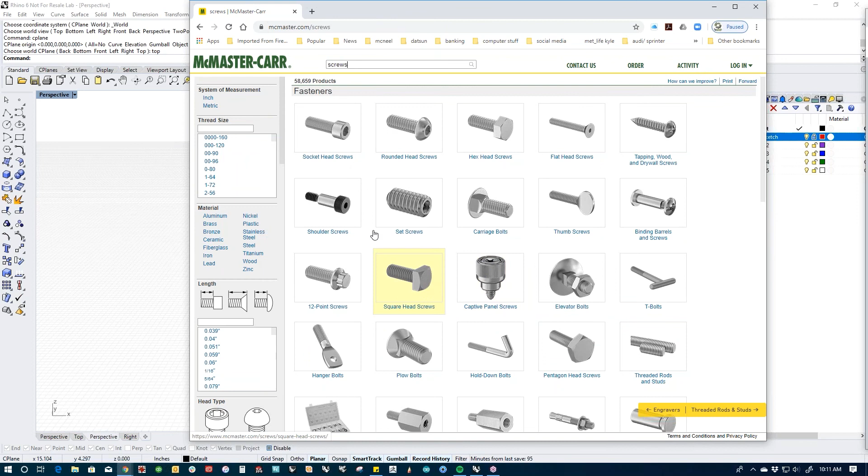Let's do metric. Let's do like 8, and then let's go. Oops, let's back up one. Sorry. Socket heads. We'll do M8, and then we'll do something like this. Doesn't even matter. The cool thing is anywhere in this list, if you click on the part, let's do M8 by, I don't know, let's do 15 millimeters long.

Click on the part, click on the product detail. The product detail, if you roll down to the bottom, it gives you a detail of it, but check this out. If I change this to a 3D STEP file and hit save, it downloads to my desktop, and then I can drag this into my model.

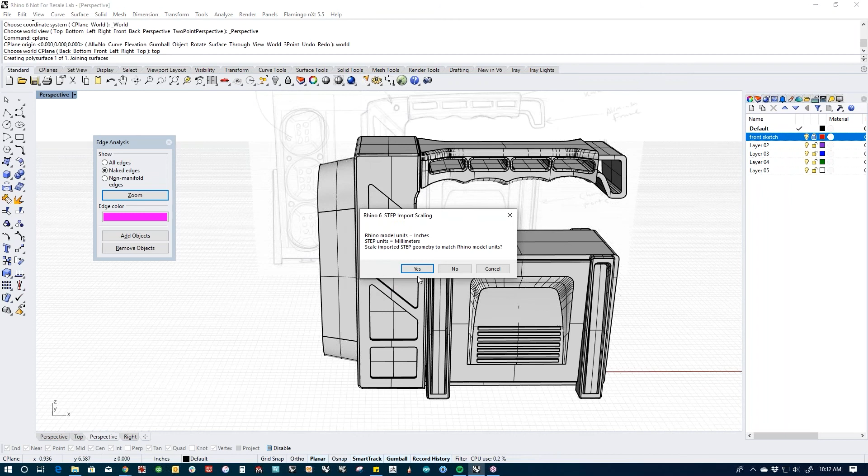And I get a perfectly formed, perfectly accurate, except that I think I scaled it when I brought it in, so it's not exact, it's not metric anymore, but picky. And then I'll take this and I'll just stick it in my model.

Now, the cool thing about this, other than just that that's cool by itself, is that these are absolutely positively dead nuts accurate. So if you wanted to put these parts in a print, I use these to make threads. And so when the part goes together, like if I want to make threads out of this thing, I'll poke it out like this.

And then I'll Boolean it out of this. I'll just do Boolean subtract. This thing, now when you do your Boolean, actually will put threads in this. If you print this and chase it with a tap, the actual part will thread right in there. And you can see that we blasted right into the frame, so I didn't place that correctly, but let's do it right.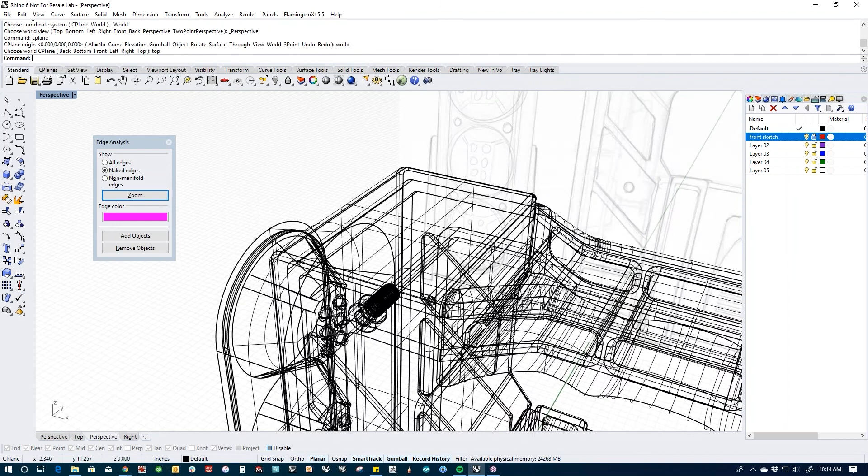So this is a huge time saver if you do a lot of rapid prototyping. I'm going to cheat and make this just a little smaller. If you do a lot of rapid prototyping, get these McMaster-Carr parts, do your Boolean subtraction, you'll never have to model threads again. You're welcome. See that? Look at that. And these are dead nuts accurate.

So if you run a tap through those, as long as you don't scale it, like I scaled these, if you bring them in accurately, they will do exactly what you need them to do, which is to create threads in your part so that you never have to make threads again. I do this all the time for toy stuff, because we're always printing things that have to be assembled. So there's your bolts for that.

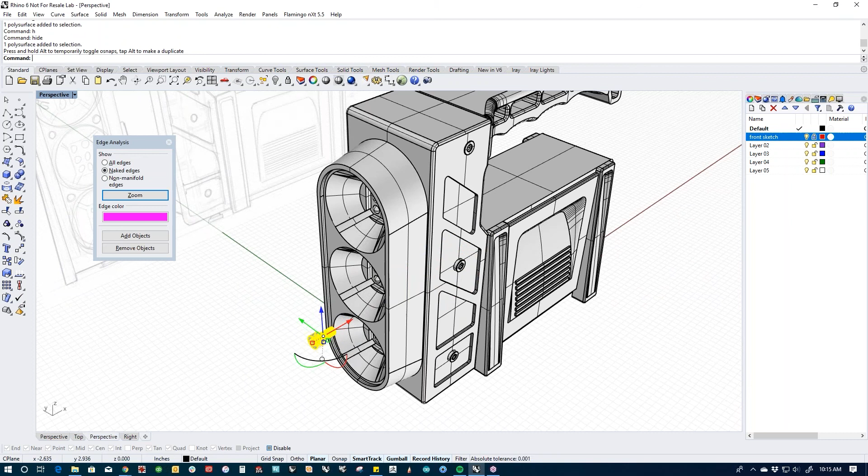Let's throw a couple in the face here just for fun. Beep. Get them underneath the lens. We're almost there. We'll throw a few materials on it and then we'll be done.

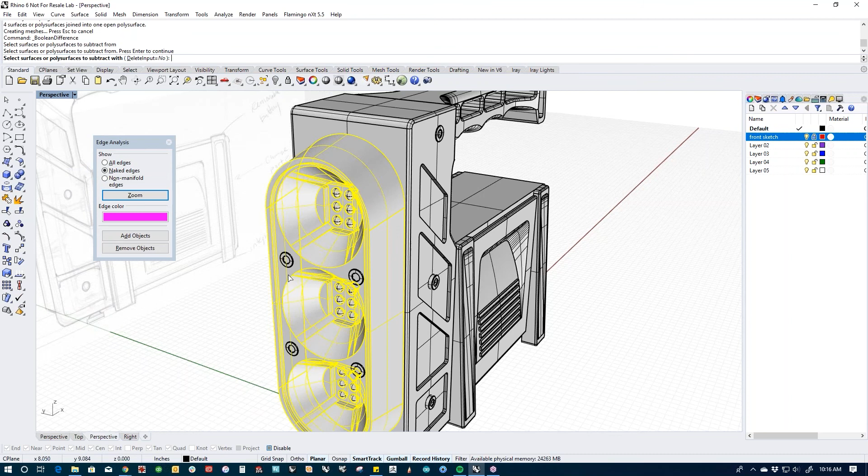The cool thing about version 6 is we can do sub-object material selection and assignment. So we don't even have to break this thing up. It used to be that if you had to have a model for rapid prototyping and a model for rendering, you had to have two separate models, and that was super annoying. Now we can do sub-object assignment and get cool stuff.

All right, so let's call this done. I'm gonna knock this one edge off here because it's just gonna bug me if I don't, and then we'll call it done. 10:16, we did all right, an hour and 16 minutes. That's not bad for this.

And if I was gonna make this more rugged, I'd add some knurling or something around here, but let's call this done. Shut the sketch off and let's save it. I haven't saved this at all. Okay, so two things.

One, that proves how much faith I have in Rhino's stability. And two, it proves how dumb I am to trust any type of software. Because faith may save your soul, but only Control S will save your data. So don't do what I did and work for an hour and 17 minutes without saving it. But let's go ahead and save it now, and we'll say a little prayer to the 3D gods for being kind to us and letting us finish this without any type of problems.

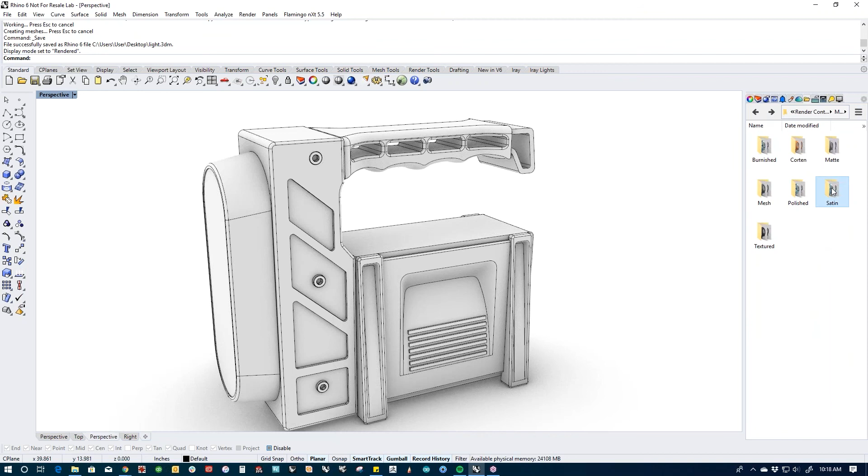All right, let's take a look at if we go to rendered view. Rendered view. And you can see that we get this kind of nice ambient occlusion version of this. Let's go to our materials tab and let's throw some materials in here. Let's do a metal. Actually, let's go to the library and let's do a brushed aluminum. Satin, burnished aluminum, burnished stainless. Satin. Yeah, let's do satin aluminum.

I'm going to drag this onto the frame. And then I might even want to polish the edges of this a little bit. Let's do burnished chrome and let's add it to that material. Let's pull it into the scene. Do we add it?

Yeah, there we go. So let's grab this and this edge. So we're in sub-object selection, shift control click. We're getting just that, and then we're going to right click on here and say assign to objects, and then we get two materials assigned to that. Let's go back to the library.

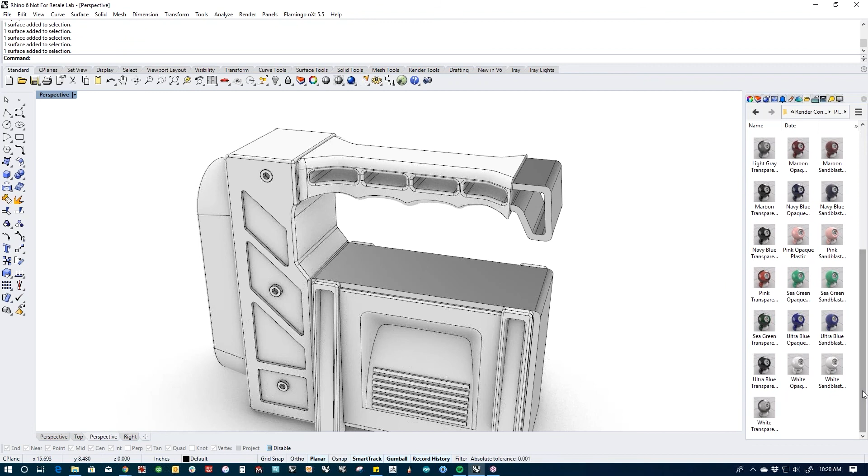Let's grab some product design stuff. No, let's grab plastic, metal, glass, miscellaneous, coffee beans. No, we don't want that. Plastic. Let's do something like sea green transparent. We'll do these kind of military-ish colors. And then we'll get some more plastic in here. I'm going to use the pink sandblasted plastic. We're going to change the color on this, but let's do it.

Let's add this to the battery, and then let's change the color to kind of an olive green, something like that. And then we'll do the same for this case up here. And then this housing needs a lens. So let's go back to the library and say plastic. No, we'll do glass. Why not? Clear glass. It's going to go on that. And then this thing, I'm going to hide this because we're going to do a bunch of different things. So let's go back to our materials.

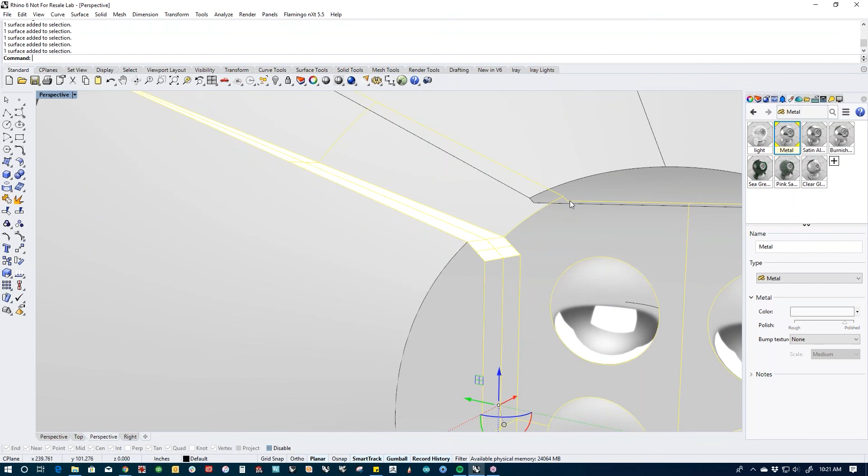I'm going to start with making the whole thing chrome, and then I'm going to make this stuff in here kind of matte, so we get some interest in here. Control Shift clicking for all this, by the way. And then I'm going to go over here and right click, let's do a new material. Let's do a plastic. I'm going to do it gray, but kind of frosty. And we're going to assign that to there. That gives us a little bit of contrast and interest in there.

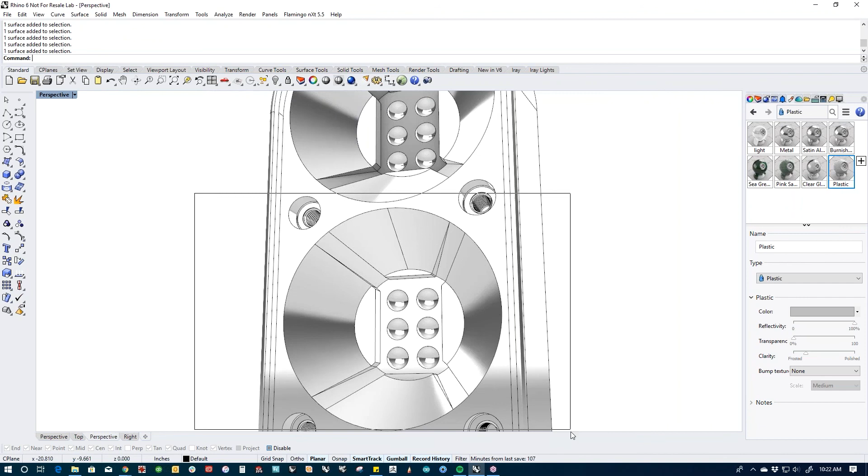Trying to get a faster way to pick this, but it looks like I'm just stuck picking.

Nothing funner than watching somebody pick something on a screen, huh? Not worth it. Stick with me. So, what did you do today? I watched a guy click a mouse for an hour and a half. Any particular reason? No. All right. It's going to get more exciting in a second, I promise.

All right, so there's that. And then let's do the face of this same matte so that we get some contrast between that and the reflectors. And then let's do something interesting for the outside. Let's do it almost like a safety yellow or something like that. See what that looks like. And I want this to be kind of flat as well.

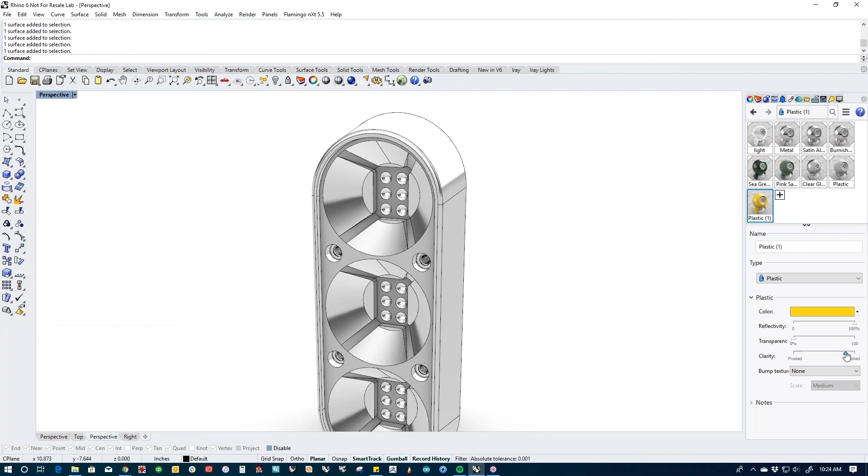The sub-object selection is cool. In this, it makes it look time consuming, but at the end of the day, you don't have to do two models, because anything that was watertight is still watertight, and that I find super useful because I don't have to break it up and make two models.

These. So it just does its thing. So that's kind of our breakup. So then we can throw this right into ray trace mode. And in fact, let's even go a little nutty and let's make a new one.

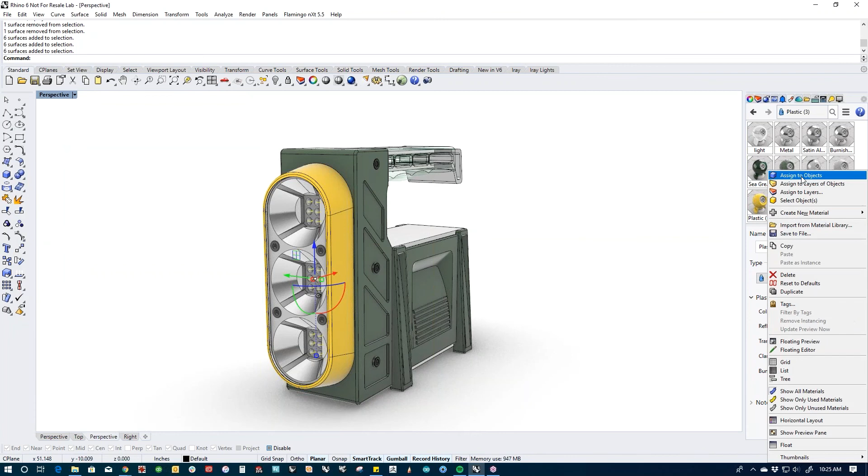And we're gonna make these white. Let's make them a little yellow, like that. And I'm gonna assign these to those. And then let's change this to custom. And custom allows us to do this, which is emission. And we'll say that the emission on these is going to be a little bit yellow.

And then let's ray trace this and see what it looks like. And I have a pretty decent video card on this. I'm going to save this again, just now I'm paranoid. And then let's ray trace it, see what we get. I like everything except the handle. I think I'm just going to switch the handle to this yellow. That's cooler.

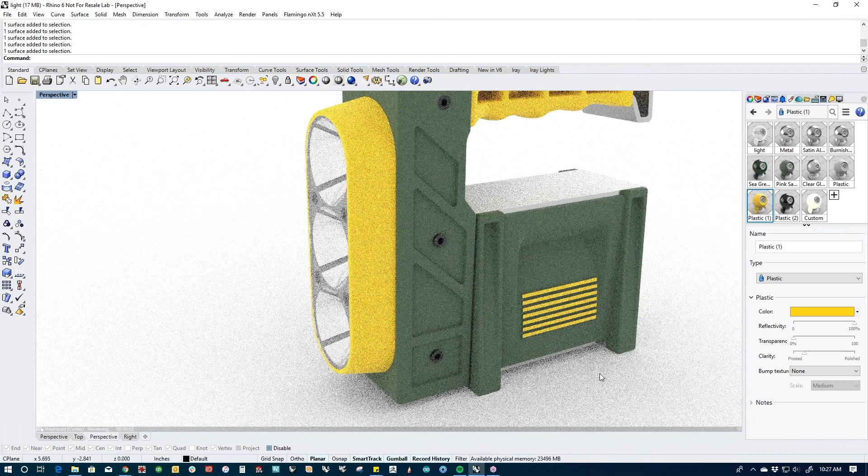We can even do things like, now that I'm looking at it, I can even say, well, it would be cool if this was a little additional detail. So I'm going to pick those and make those yellow. And maybe even the insides of these. Something like that.

And then the last thing I'm going to want to do is go up here and check the camera. I'm at a 50 millimeter lens length. If I change this to 35, see how it gives me a little bit more dramatic perspective. And then I'm just going to let it run.

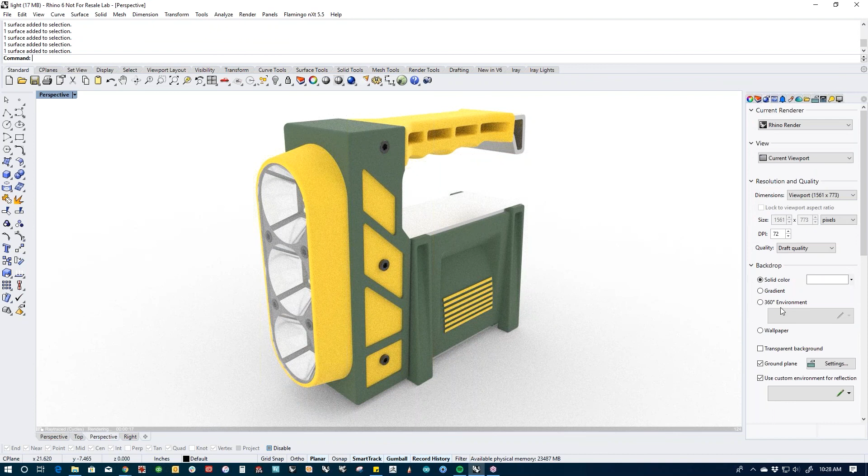Now, in ray trace mode, we don't get any post effects like glow or anything like that. If I wanted to, say, drop the background of this a little bit so it wasn't white, so if we go here and I take this background and instead of being white, we drop it to something like that, that's a little bit more dramatic for a flashlight.

And then if I was to go in and light these things up and then put glow on them and then actually run a ray trace, a render, then we could actually light this stuff up and make it look like it's all lit up. But this is pretty much it. This is the end result. You can see down here in the right-hand corner, it's resing up, and as it continues to do so, it will finish that up.

And then as it's going, you can make judgments as to how your materials are looking. Like, are they too matte? Are they too shiny? Do you like the colors? Do you want to change the colors? And that kind of stuff. And so those are the kind of decisions that you can make along the way.

And then when you get so that you're happy with that, you can either let it res up and finish and just use this as a ray traced image as itself, or you can just go up here and hit the button, and that actually turns on a regular ray trace render, which then opens up some additional things like gamma and glow and things like that you can then mess with if you need a little bit more advanced rendering details.

But as it sits, I think most of the time, this is all my clients need. They just need a good representation of what's going on and then go from there.